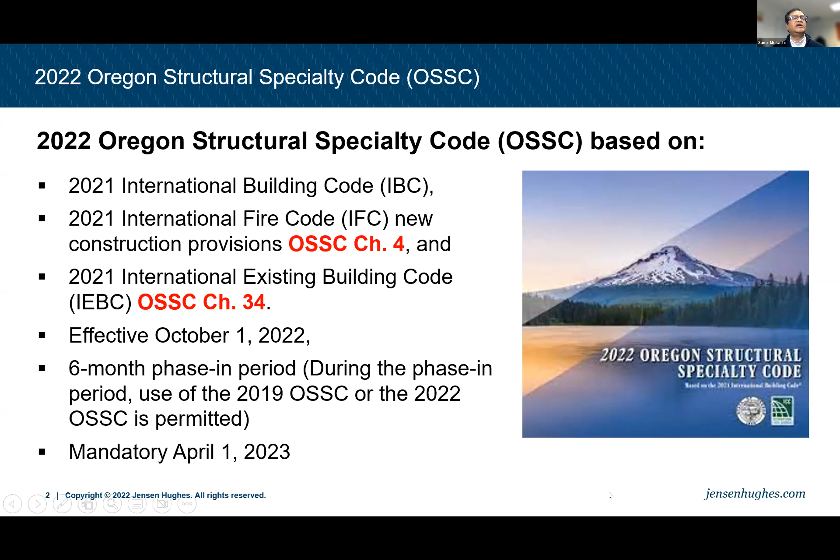Jody will talk about the energy code and the process involved with that, because we went from the Oregon Energy Code, which was the basic code that came from the energy code, and Oregon had developed something, to now going to ASHRAE as the base code and then modifications. So our energy code is actually a much smaller book, similar to the IEBC in Chapter 34. The energy code also gives you things that are changes, and then you compare it to the base ASHRAE and use that as a combination together.

And the Oregon Energy Code is still the 2021 Oregon Energy Code. In between, there was the zero code also. So we have gone through some name changes, but this is where we are on the energy code. And Jody won't go into the technical requirements because, and I might use the wrong word, she's not allowed to give technical clarifications. That is restricted to the building official. So she's going to talk more about the process, and I can talk about the code and things like that, and we'll answer your questions based on that.

With that, I'm going to roll into the changes to the 2021 IBC and the 2022 OSSC. So if I don't point out that this is an OSSC change, it is a base IBC change that Oregon has adopted. One of the things that the code changed in this cycle is the definition of the penthouse. So in the code, the penthouse and the equipment platform are really the two spaces where the code especially says that it is an unoccupied space.

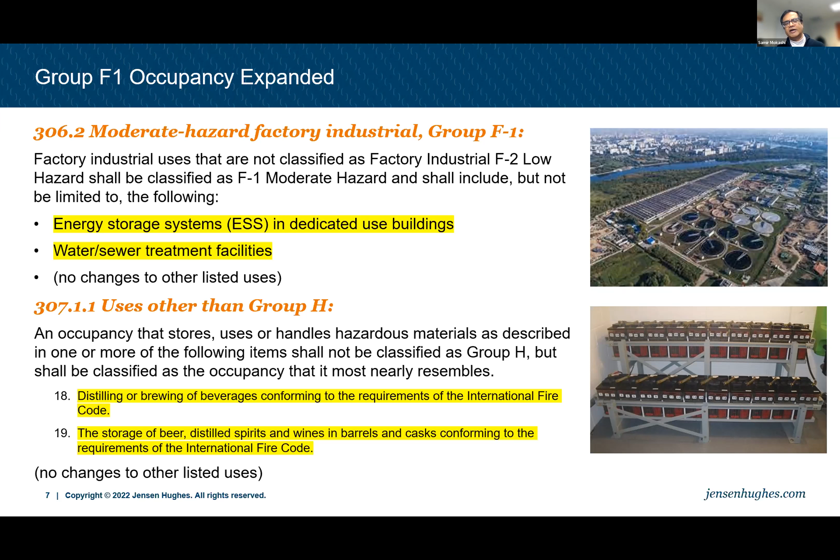But when it's mixed with water, it's very hard to ignite it. So the code is recognizing that dichotomy of the material and how it performs when it is mixed with water. And that's what it's doing. There were provisions in the code. In the fire code, there were different places you had to go connect the dots across multiple chapters and demonstrate that this could be a non-H occupancy, which is how we did many appeals in the past. But now the code is bringing that into the mainstream of the code and clearly articulating what that does.

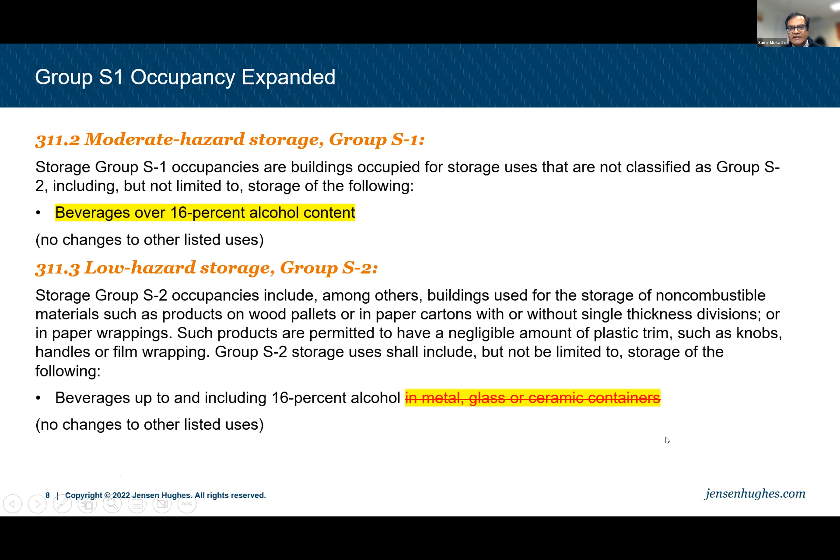Similarly, the moderate storage group S1, the IBC did not have beverages over 16% alcohol content, so that got added in the S1. The IBC in the S2 is keeping beverages up to and including 16% as an S2 for storage. Over 16 is S1, 16 and under is S2, and they took out the metal, glass, or ceramic containers because it's just based on the alcohol content.

And in Oregon, we added back in wood barrels, metal, glass, or ceramic containers because wood barrels are kind of an important part of how we treated it. And that's also how we treat the F2 occupancy. So that's the connection that Oregon has had, and we're continuing forward. So it's not a change to Oregon. It will show up as a change in the OSSC, but it's carrying forward the original intent Oregon was already doing.

Here's a discussion about something that changed in the 2018 cycle, not the 2021 cycle. A room or space used for storage purposes that is accessory to another occupancy shall be classified as part of that occupancy. The IBC says shall be classified as part of that, and Oregon says may be classified. So what that means is the IBC says if this is a B occupancy and this is storage, it has to be classified as a B occupancy and it's an accessory to this.

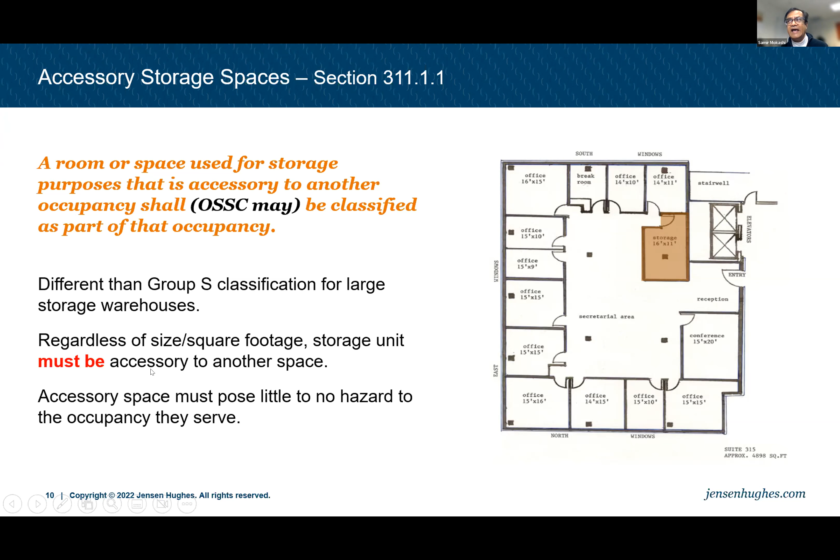So one of the things about accessory and non-accessory: when do you become an occupancy? I've always used the 10% rule. If an accessory goes over 10%, then it becomes a minor occupancy within the building. So the same philosophy I would approach here, that if you have storage that is more than 10%, rather than classifying it under the main occupancy, you should be classifying that as a separate occupancy. So the IBC statement is regardless of size it must be an accessory, but I don't think the code really intended it that way, because the hazards of storage should be considered beyond 10%.

Samir? So, yes. Sorry, I was just going to add one thing. There are also some reasons in Portland why somebody might want to keep their storage in S instead of moving it to that B, with our seismic triggers. So there are some local incentives where you might not want to do that shall, like he was talking about.

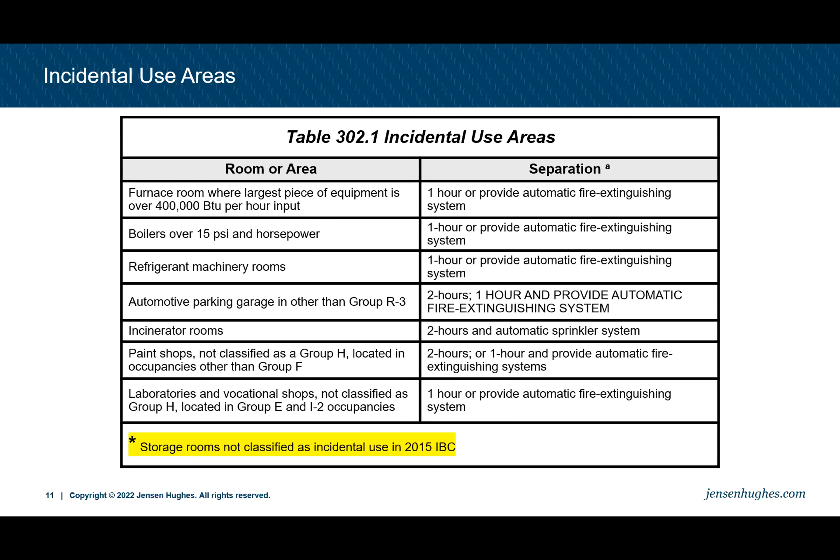See, great insight. That's why I asked Jody to join us this time. Thank you, Jody.

Incidental use. I don't know if everybody knows the difference between incidental and accessory uses. Incidental uses are typically functions that are part of the main building occupancy and are part of the building. Accessory uses are very distinct functions that become part of the main occupancy. So for example, a boiler room or furnace room that is common to most buildings becomes an incidental use. An incidental use is actually a room or an area that by nature of its operation can be a more hazardous room. And storage rooms used to be considered incidental rooms, and now they're considered accessory as part of the main occupancy. That's the change that took place.

As we have started going into mass timber construction, the codes are evolving associated with that as well. One of the things that is changing is that Type IV-A and Type IV-B construction more than 120 feet in building height require fire pumps with connections to no fewer than 2 water mains. If you go to the high-rise provisions, chapter 4, that's where this provision comes from.

In the past, when this first came into the code, I think in the 2006 edition, there were 2 separation requirements. Then the code wanted to change that to 420 feet, but that was mislabeled as 120 feet for a couple of cycles and then changed to 420 feet. And now with mass timber, that provision is going back to 120 feet for mass timber.

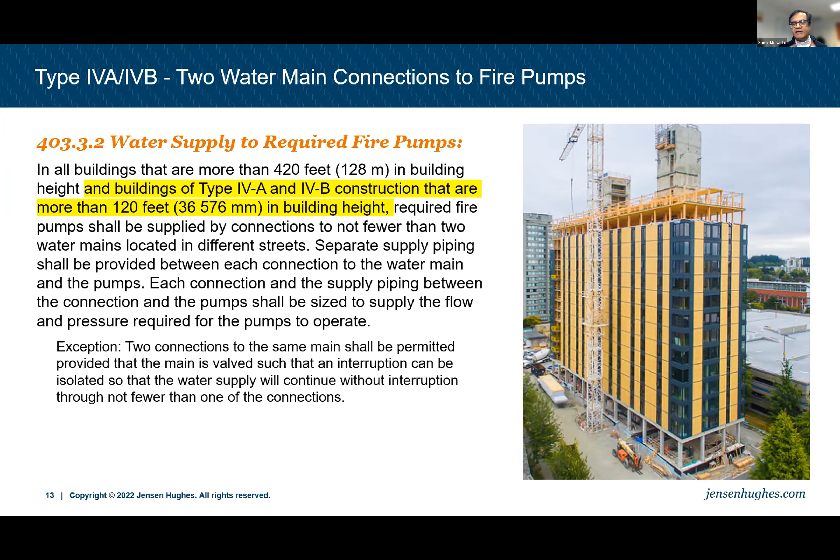Smoke control. One of the things about smoke control is the atrium concept has evolved. In this code cycle, the code has clarified the atrium definition, because I keep coming across people who say a 2-story opening is an atrium. And the answer is no. The 2-story opening can be treated as an atrium. There are multiple ways you can protect the opening. Atrium is one of them, but that's a different story.

What has happened is the code is saying that if you have a 2-story opening and the rest of it is separated by shaft construction, then the 2-story opening can be treated as a 2-story opening and does not need to be separated from the atrium above with the provisions of the shaft. If it's separated as a shaft opening, then smoke control is not required connecting that.

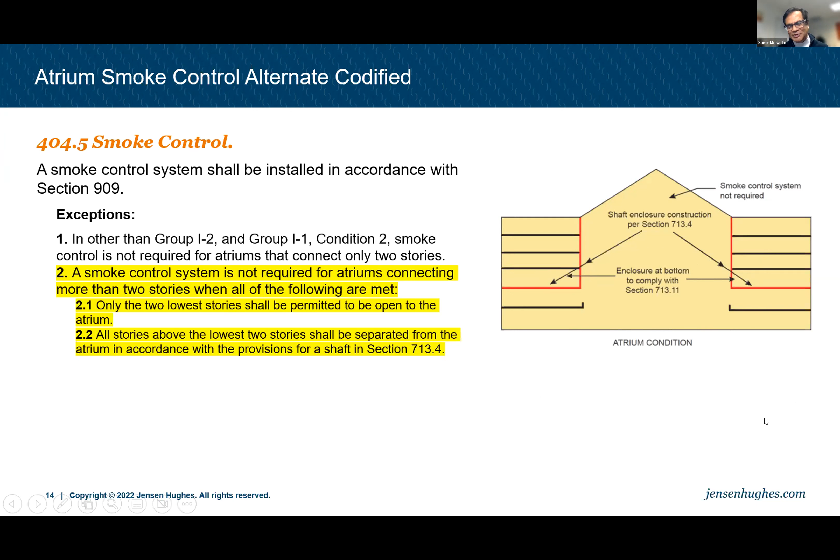This is an appeal that we've done in Portland quite a bit, and in many other jurisdictions, where the question comes up: I only have a 2-story, and commonly it's a 3-story building where the 3rd story is physically separated, so how do we deal with that? The code is now giving a prescriptive path. I'm sure your architects will find a way of doing something different than the code says, but at least this gets us closer to where the most common questions come up.

Another thing that gets clarified in the code is the enclosure of atriums and connections. The code allows 2-story openings to connect, but you cannot have the first and second story connected here and the second and 3rd story connected here, because then it connects together. So the question becomes, how do you deal with an exit access stair or an escalator that is going through? In the enclosure of the atrium, the horizontal is not required between atrium openings for escalators or exit access stairs.

Another thing that is changing, not a big deal for most of you, is that in parking garages there used to be a requirement for drainage. That requirement was taken away, and now it is being brought back in. There was a requirement for approved non-combustible, non-absorbent materials, and the S-2 parking garage exception that allowed no drainage went away, so now it will be required. We can have a traditional trench drain, or there are very thin drains that are not very visible but still work as drains. There are multiple options to solve those.

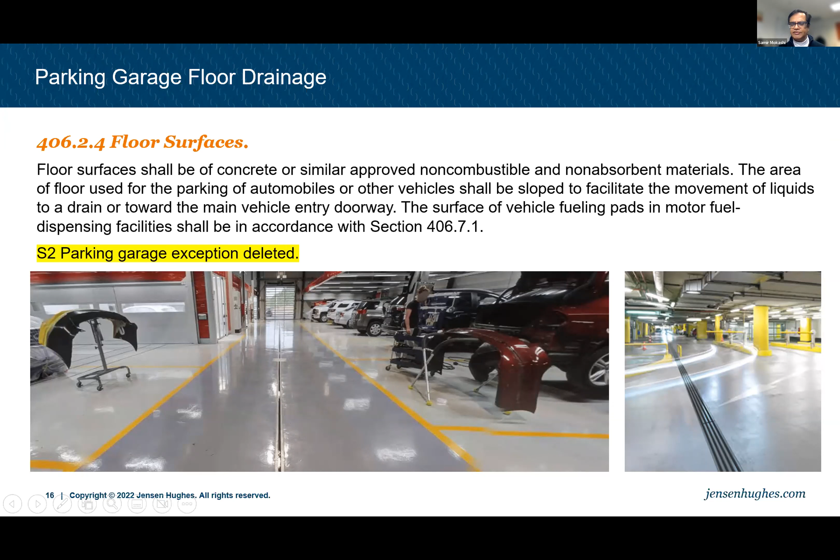Those are just aligning with NFPA 101. NFPA 101 and the I2 occupancies will continue to have differences. If you look at the basic business proposition, they both need to sell their books, and if they're all the same, you'll only buy one of the books. So there's always going to be a difference between the two.

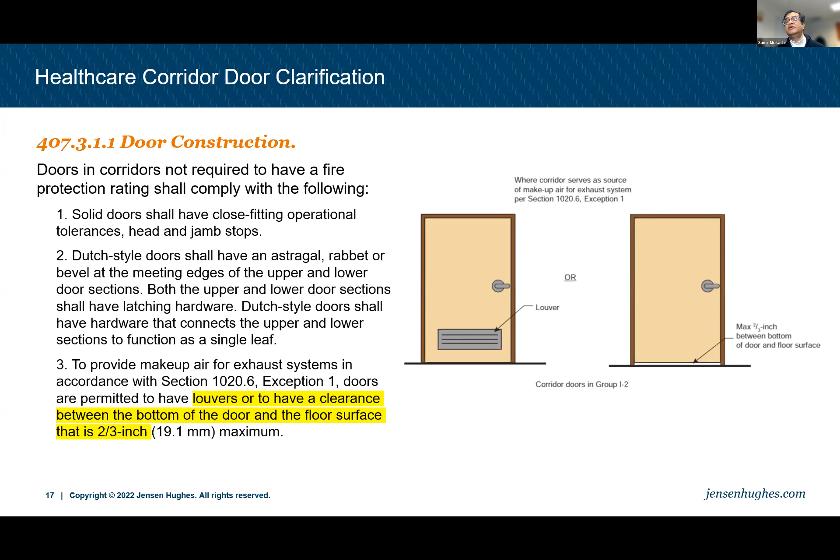So another thing in the I2 occupancy, which is hospitals and healthcare related occupancies: care suites, as they used to be called just suites before, are now called care suites. That change took place just last cycle or the cycle before. The exit access from other portions of the building not classified as a care suite shall not pass through a care suite. The whole concept of the care suite in a healthcare facility is that it's a protected group of rooms given some relief from other requirements, so making sure nobody else goes through those rooms to keep them independent and meet the intent of the code is important.

Another requirement is having a door leading directly to the exit access corridor, horizontal, with 100-foot travel distance within a care suite, plus an additional door leading to exit access or an adjacent suite, which is part of the means of egress. These were part of NFPA but not clarified in the IBC. Now IBC is aligning with NFPA on that. It's not a change for those who've been engaged with it, but it's the two codes coming together and aligning better on that issue.

Here's another thing the code is doing: clarifying the code intent and codifying it. Going back to the firewall requirement, the firewall originally was a building separation. Then in the last code cycle, around 2015 starting in 2018, it made additional changes. The code clarified that the concept of a firewall is to separate two structures of different construction types, having their own allowable area, heights, and story requirements. For example, you could look at the two structures as a single entity for means of egress. So the code limited what the purpose of the firewall is.

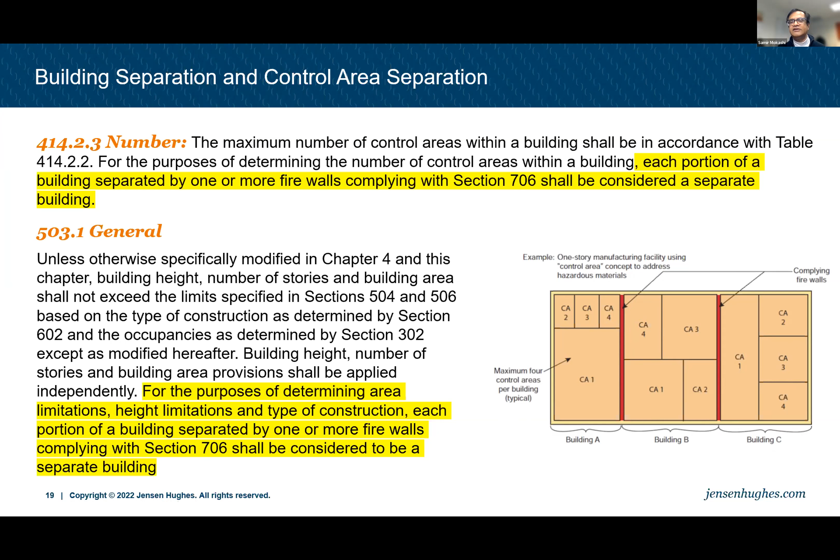By doing that, one thing they did not address was control areas, where hazardous materials are stored in the building. The code has a compartmentalization concept allowing multiple compartments to permit increased amounts of chemicals. Control areas and lab suites both do the same thing. In practical interpretation, we always said that once you have a firewall, on either side of it you can start over with control areas, but it wasn't very clear in the code, especially with the language that was added. Now that's clarified in the code, showing the intent that the firewall was meant to separate other areas as well, but where it's not explicitly stated, you could combine it.

Here's another thing about firewalls in general: the firewall requirement is to separate buildings. In the legacy code it was called an area separation wall, and there was a provision for it to be structurally independent, but it was never read or enforced that way throughout the West Coast. So our firewalls or area separation walls were built like fire barriers, just with higher fire ratings—typically fire barriers were 1 or 2 hours, while area separation walls went up to 2 to 4 hours. So now the concept of the firewall is to be structurally independent.

It's very hard to build a structurally independent wall, because that literally means the wall stands by itself as a cantilever structure, which is expensive and difficult to build. So most commonly, as the building gets taller, you set up 2 walls, which the code permits. The IBC had a table that said how to build 2 walls, but right now it refers to NFPA 221 for the requirement. So if you have a 4-hour firewall requirement, you build 2 3-hour walls. If you have a 2-hour firewall requirement, you build 2 1-hour walls. It's kind of an explicit table in the code.

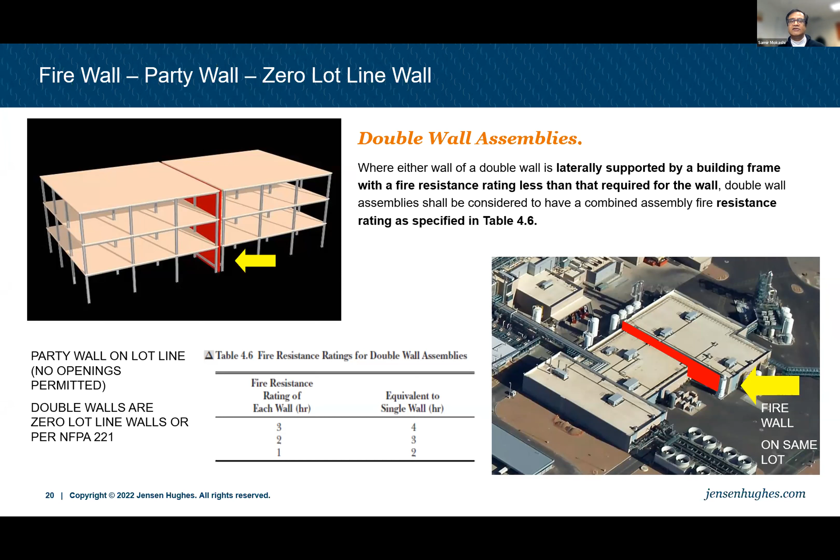So the question that comes up: if I have 2 2-hour walls, does the structure providing lateral bracing for that wall have to be fire rated? This goes to the basic concept in the code of making sure the structure holding up the wall is rated so the wall can keep standing. In this instance it's unique, and this is clarified in NFPA 221, more so than the building code. Because there are 2 walls, if one building collapses, it takes that wall down with it. The other wall is still standing, and that is a rated wall. So the structure collapses, and because the structure has collapsed, it opens up the fire and there's no ceiling above, so the fire goes vertically up. The intensity of the fire and the exposure on the wall reduces, and then the fire has to compromise this wall before it affects the other structure. So this 2-hour rated wall protects the structure behind it. Essentially the code is saying, as long as the wall is load bearing and the load bearing components are holding it together, the structure behind it doesn't need to be fire rated.

Here's how you terminate firewalls. When firewalls come to the exterior of the building, it's required to have 18 inches beyond the wall. Most commonly you don't see that, so what's going on? Commonly there are 3 conditions: combustible exterior sheathing, non-combustible exterior sheathing, and non-combustible exterior sheathing with sprinklers. Based on that, you can protect the perpendicular wall, terminate the firewall at the end of the building, and have perpendicular walls either protected for 1 hour, just non-combustible sheathing, or nothing required if you're sprinklered and non-combustible.

Similarly, when you have 2 buildings next to each other, how do you terminate that wall? The code allows 2 paths. Until these 2 paths were defined, we commonly used this condition where you have a building here and a building here, and this firewall comes through. The firewall, when the 2 buildings are on a common lot, becomes the assumed property line. The code allows the designer to pick the assumed property line, but once you do a firewall between 2 buildings on the same lot, that is the assumed property line. You bring the assumed property line up to this structure, and then it goes either straight out, or you can jog it, straighten it - it's up to the designer's choice. For example, in this instance where it's right at the property, this wall becomes a 0 lot line - the wall is 0 feet for the fire separation distance and treated that way. This other wall, which is perpendicular, now has 20 feet or more, and can be treated that way. That's how you design the exterior walls.

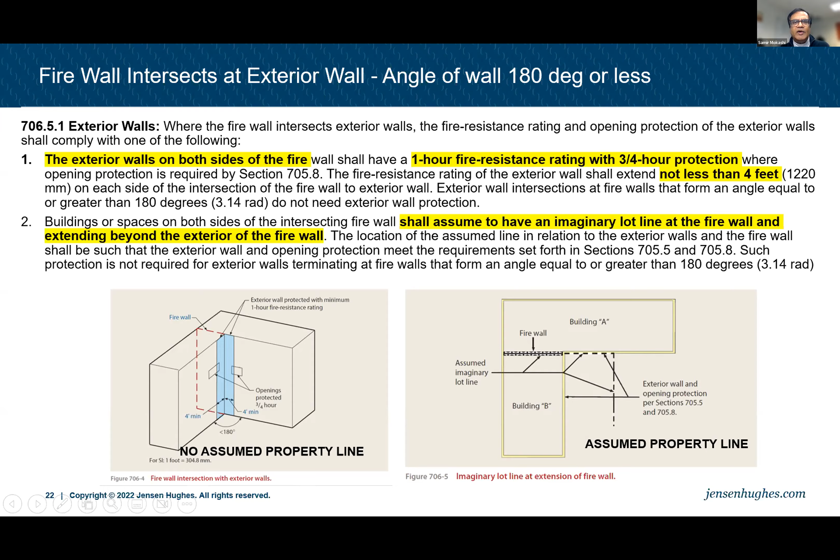Cross-laminated timber. Oregon has been ahead of the game in terms of cross-laminated timber. We adopted mass timber very early, and cross-laminated timber is a subset of mass timber. It's timber pieces that are perpendicular to each other, so one layer goes north-south, the next goes east-west, and the layer below goes north-south again. That's how cross-laminated timber is prepared.

There is glue laminated timber, or glulam as we know it. There is nail laminated timber and parallel strand lumber, so there are multiple ways of creating mass timber. Mass timber is essentially thicker engineered wood, and it's different than heavy timber. Cross-laminated timber is where we've gotten engaged, and it's called mass timber in the general materials. It's a very exciting change in the code, and very helpful in many aspects.

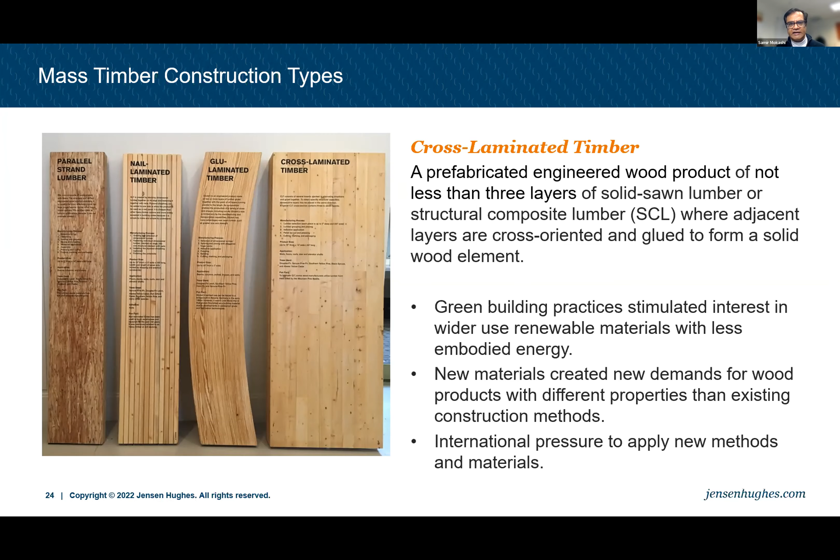In the last code cycle, Oregon adopted mass timber, but it was adopted as an appendix. Appendix P is where the mass timber provisions were brought in. Those were the provisions in the 2021 IBC that Oregon pre-adopted before the 2021 came in. That's one of the things Oregon did, and those become Chapter P, but now it will go into Chapter 5 or Chapter 4, Chapter 6, where all construction type related activities go.

It's useful to know that type 4A was based on Brock Commons Tallwood House back in Canada. Type 4B was based on the Framework building that Lever was doing here in Portland, which never actually got built — it went through the design process, got to the plan review process, but never got built. The construction type 4C was based on the Carbon12 building; I think Path Architecture did that, and that is the basis for the type 4C building. So this is where it came from.

In terms of allowable area, a lot of times people ask where do the allowable areas come from — they look so precise. Is there engineering or science behind it? Yes and no. There was a period in the code where construction type and allowable area were based on assumed fuel load. The New York State code had that provision for the longest time before they moved to IBC — through 2003, 2004, they had that provision, actually classifying buildings based on fuel load inside.

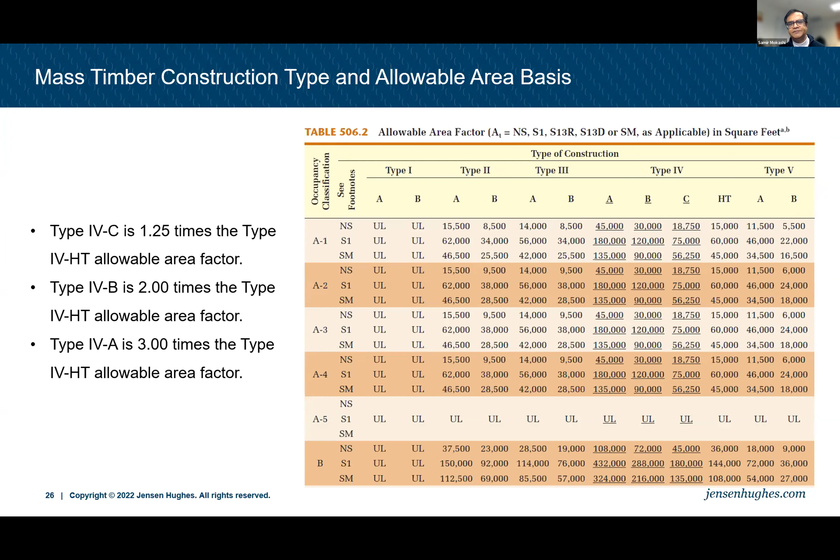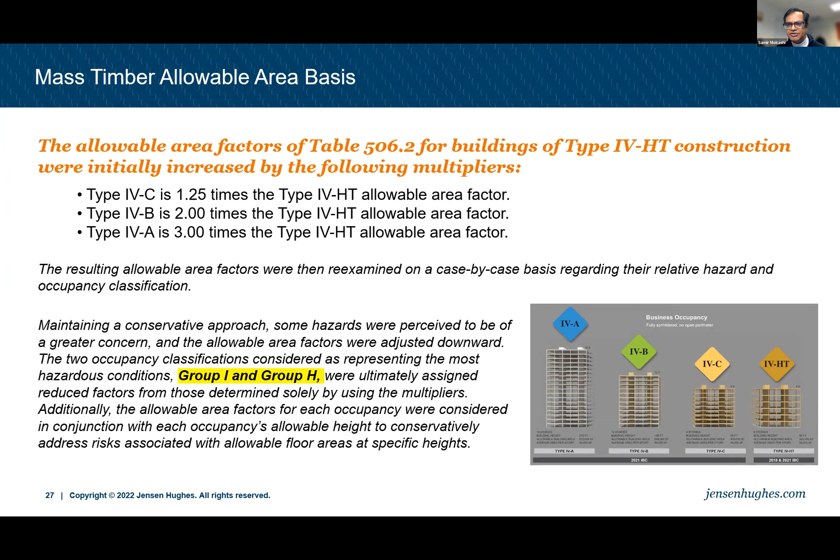One of the things they did, once they set this up, is they took the groups considered higher hazard — Group I and Group H — and their numbers were adjusted down to compensate for elevated hazard for these occupancies, especially in wood construction, which is how heavy timber relates. Why do I want to tell you this? Because it's always good to understand the code intent and where the code comes from, since this is still an evolving construction type, with challenges in how you can build it in terms of member sizes and things like that.

Here's an example of what I was talking about. There are actually two buildings that we worked with.

One is called Catalyst, and one is the Flatworks building. The Catalyst building was not in Portland, the Flatworks was in Portland. In the Catalyst building, the structure is multiple joists spaced close together, so the structure is very compact, but the Flatworks has deep glulam beams, almost 3 feet deep. And so in that building, the number of stories met type 4C, but the building height exceeded it and it became a type 4B. So paying attention to structure becomes important.

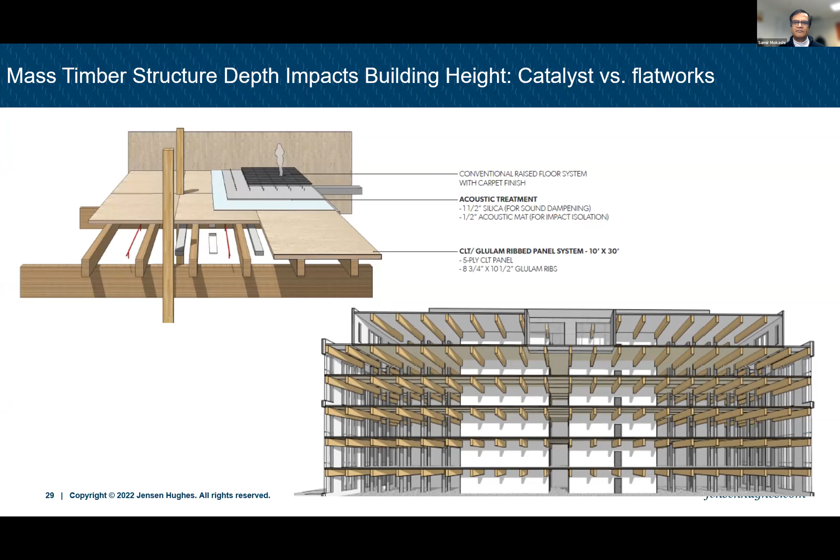So here are the basic requirements. In type 4C, if you look at all the components, the basic structure is 2 hours, versus type 4 heavy timber, where it is 1 hour. By using a higher rating for the structural systems, that's where the increase in allowable areas comes from. Then in type 4B, the construction of the structure doesn't change, but the exposed wall and ceiling changes. And in type 4A, the rating of the structure increases and there is no exposed wood inside the building.

So type 4C is what everybody loves. Type 4A most people don't like, but the reality is that type 4A is still a very efficient system. Eventually, as we get past the aesthetic of the wood and look at it as an efficiency factor, I'm pretty sure we will start seeing more type 4A construction as an efficient way to build buildings, because it comes as preset components. It's like a Lego set, it gets assembled very fast, and that might be where its advantage shows up. But right now, type 4B and type 4C are the more prevalent buildings that we see.

The exterior wall requires gypsum protection, so you don't get exposed wood there. And then concealed spaces have to be addressed as well. As you can remember, in type 4 heavy timber, concealed spaces were not permitted. Under type 4A, B, and C, concealed spaces are permitted and you have to mitigate them. And now in this code cycle, there is a change to type 4 heavy timber in that regard as well. We'll talk about that in a little bit.

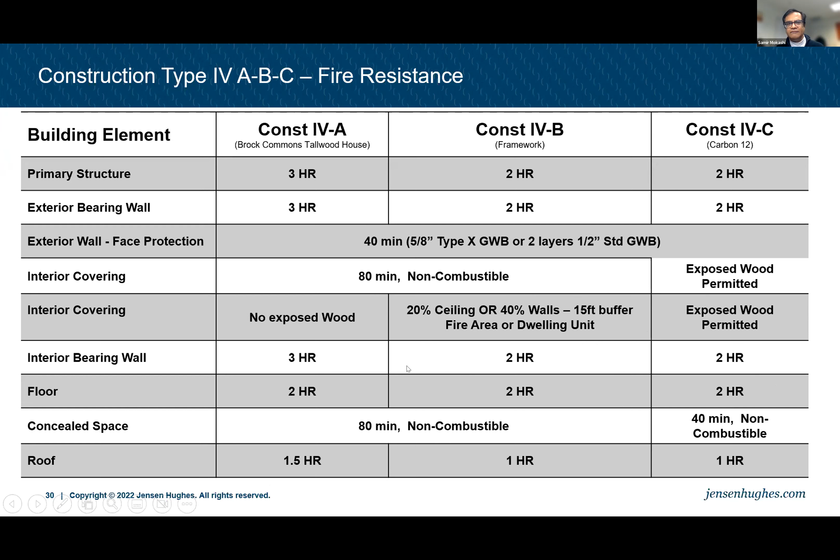So in the interior spaces, the 20% ceilings and 40% walls were based on the area of the room. So you could have exposed wood on the walls and some exposed wood on the ceilings in construction type 4B. In type 4A none, and in type 4C everything can be exposed.

Oregon is changing that and allowing 100% of the floor to be unprotected at the ceilings. So where you had ceilings that were partially wood and partially protected, you could have complete wood ceilings in type 4B in Oregon. The walls are still at 40%, but the 20% was changed. This is based on the 2024 IBC changes. The Tall Wood Committee has been looking at this for some time, and they have done testing and demonstrated that ceilings do perform well and don't need to be protected in type 4B. So that's where it's coming from.

So the protection of structure. The code says you can protect it by wood alone, or you can protect it by adding material to it, so you get a composite panel for the fire rating. If you look at basic fireproofing, sprayed fireproofing on steel is essentially providing an insulating material around the structure to prevent the heat of a fire from reaching the structural element. That is the same thing wood is doing, allowing an insulating material in front of it that will protect it.

The other alternative is that you take the wood component and oversize it. So if you need 4 inches of depth for your structural requirements, you add 2 inches to it, make it a 6-inch slab, and that extra 2 inches becomes the sacrificial wood that is okay to burn out as part of the protection for the system. That way you could have exposed wood all the way across. When you add gypsum, it protects the wood, but you lose the wood exposure. The code allows you a calculation method to do it.

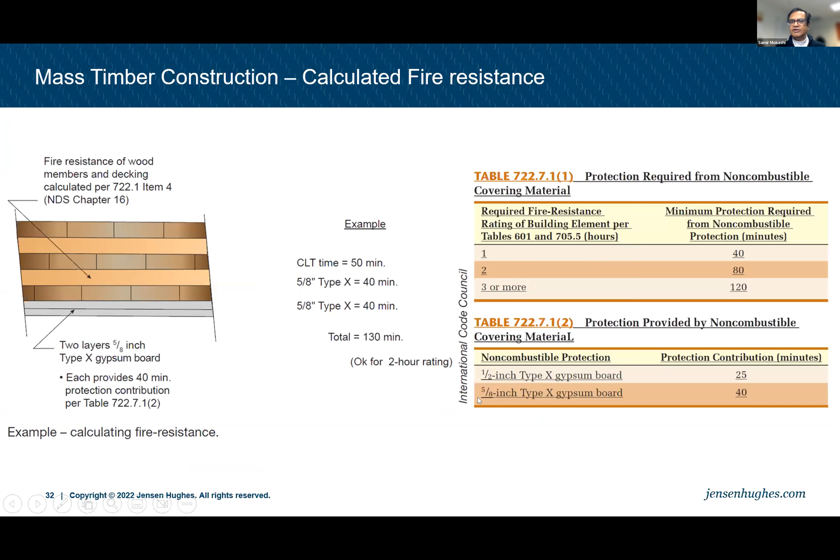So one of the things about calculating fireboard membrane systems: there is a general wallboard membrane that gives you calculations, and there are mass timber specific requirements as well. So mass timber addresses some of the elements. This is the general wallboard membrane requirement, and this is also in 722.6.2.1. So the wall membrane and calculated fire resistance is already part of the existing system, but it was co-opted into the mass timber, and that's where we work with it.

One of the questions that often gets asked is: I have a mass timber floor and I'm going to put gypcrete on top of it. Does that give me fire resistance? No, it does not, because the protection needed is from the bottom, and the gypcrete above does not protect the wood from the fire exposure.

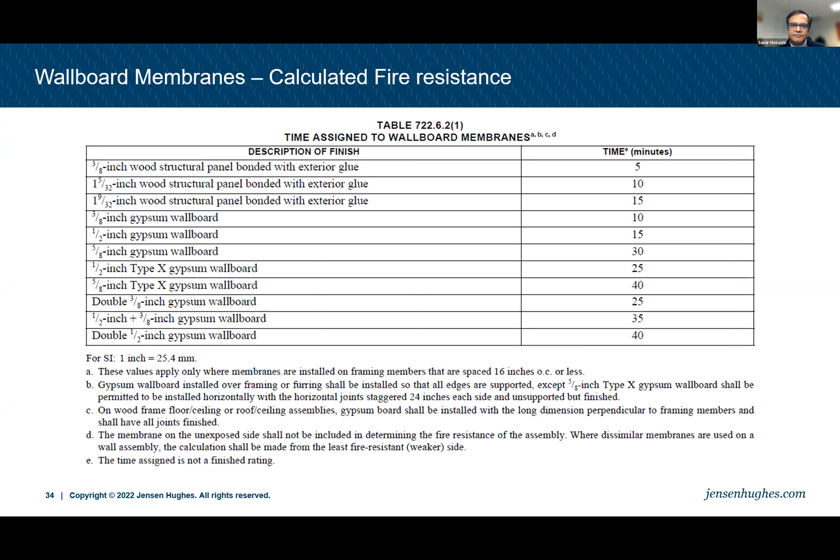The other thing that comes up quite commonly is the fire rated joints. If you look back to this structure, the connectors are all outside the wood and exposed. More common now are the hidden connectors between wood elements. And these become very good because they are easy to install, and they can come pre-drilled, pre-assembled, and you just slide it in and it works. And you can put fire caulking around it and it gives a good solid seal. So these are actually better systems.

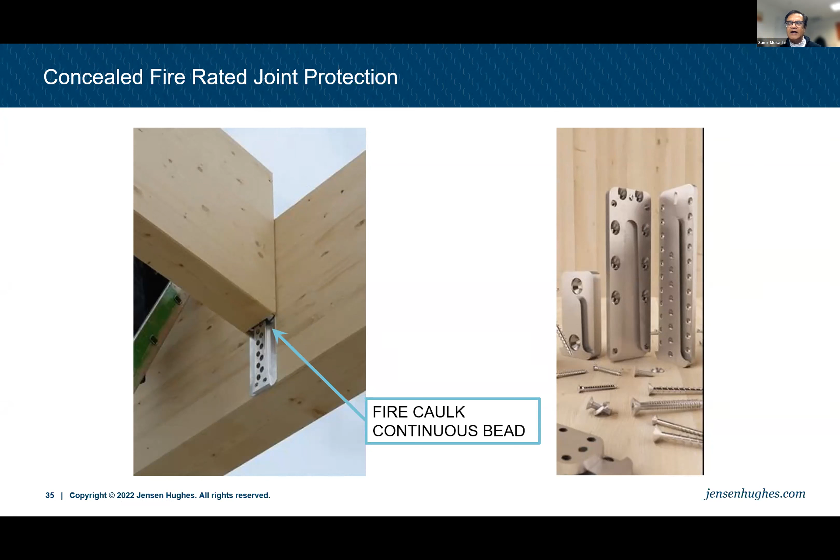The early mass timber connections became more of an extra effort, with intumescents on top of that, or wood covering on top of that. And then as these systems came out, everybody went to hidden connectors, and it has become much better that way.

Through penetrations in mass timber are different than standard. They are specifically listed and approved for mass timber. And the issue really is what happens when a system is connected to a through penetration. If you look at fire rated wood assemblies, at the bottom is the gypsum board or non-combustible element. So the fire rated structure, on the side exposed to fire, is almost always non-combustible. In mass timber, the exposure is wood.

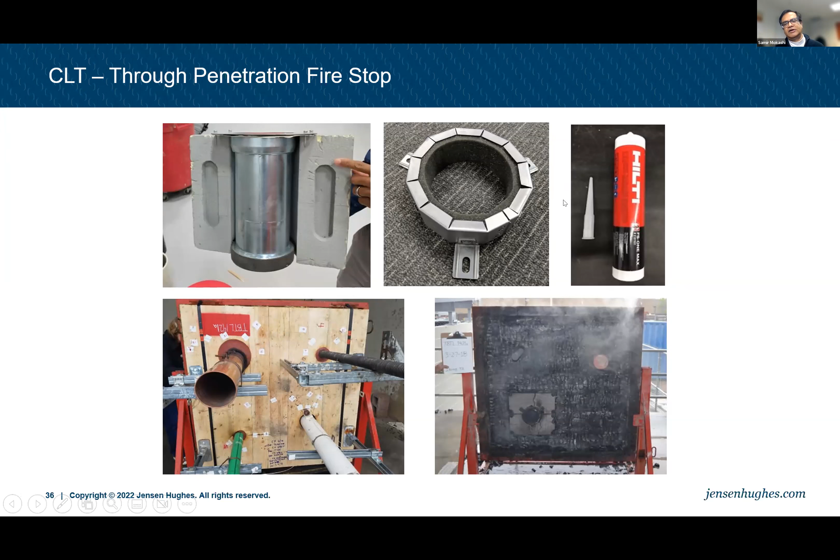So when the fire hits this condition, for example where the pipe is going through, the fire will burn around the pipe and make that gap bigger. So that's a concern that has to be addressed as well. And so these are different systems that will maintain that rating and not allow the gap to go through. These are tested specifically on mass timber, and those are the ones that you need to use for it.

Here's another thing that is not a change in the code, but I wanted to bring up because that's a common miss. So for mezzanines, the mezzanine area is limited to 1/3 of the room or space it is located in. Still, many architects think of mezzanine as 1/3 of the floor area. It is 1/3 of the room that it sits in. So that is important to do.

And the second thing about mezzanine construction: the code does not clarify what the mezzanine construction is, but the code commentary has clarified the mezzanine structure has to meet the building construction type. Therefore, the fire ratings of the building have to be done. There are mezzanines in Type 1A and Type 1B buildings that are just non-combustible mezzanines that are built in, but those need to be approved as an alternate based on limited size, contents, whatever. Otherwise, it needs to meet the construction type.

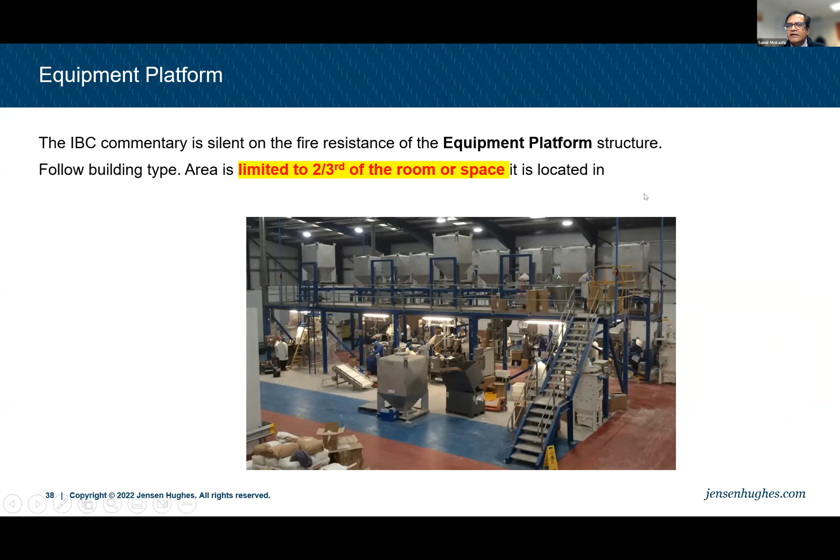On the other hand, for the equipment platform, the code is silent on the fire resistance. So equipment platforms could be non-rated because the code does not clarify what that requirement is and does not mandate it.

Here's another aspect of the code that is not commonly understood. When the code came in with the non-separated uses, most designers now want to do non-separated uses. There is still a place for mixed occupancy. And it's important to understand the difference between mixed separated occupancy and mixed non-separated occupancy, accessories, and all those components the code designs with. So let's take a look at this.

So in this particular instance, let's say there is a B and an A occupancy. The total building area is 9,500 square foot. You have B and A occupancy. If you do non-separated, then you have to calculate the building allowable area as if the entire building was an A occupancy. In this instance, the entire building could be A occupancy. So having a combination of non-separated A and B and designing to the most restrictive A occupancy is the solution, which is what we commonly see.

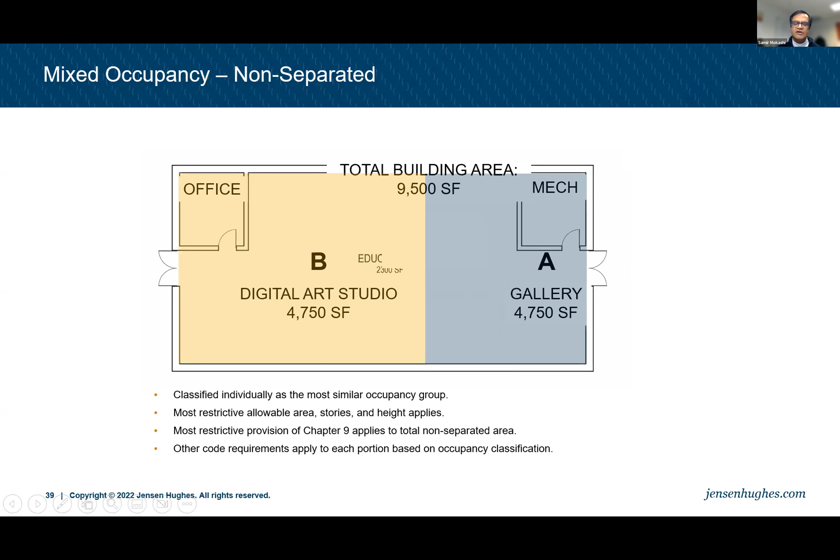But it's important to understand which of the occupancies you have, because even though it's non-separated, you still have to identify the individual occupancy. You cannot just call it A occupancy. You have to call it A occupancy and B occupancy and meet all the requirements of each occupancy outside of the allowable area requirements.

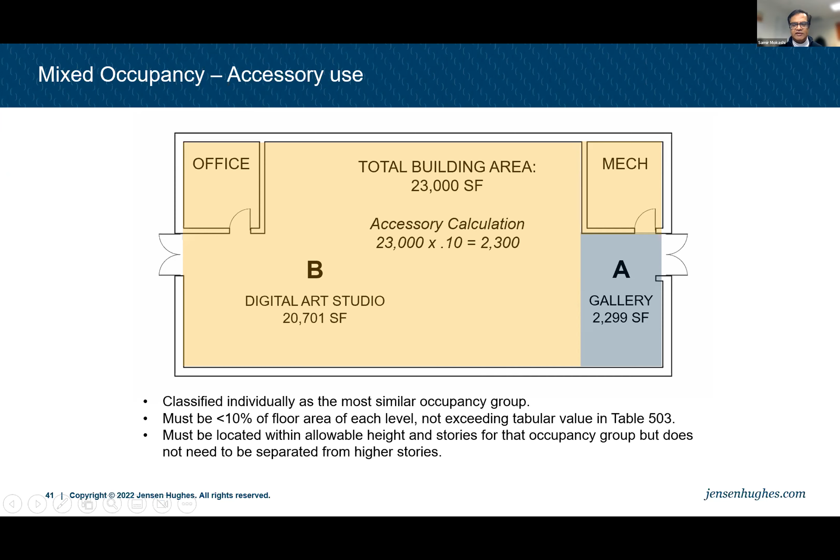The other thing to pay attention to is A and B. If you say that this is going to be 10%, how does the building official ensure that down the road this doesn't grow and become 20% of the floor area? That is an important question that often gets asked in the plan review process, and you might be asked to demonstrate a physical barrier or something like that to ensure that the A remains that size and does not grow. And when it does change, there is an ability to administer the requirements. So here's the discussion about mixed occupancy and accessory uses, how it all comes together, and how it matters in the end.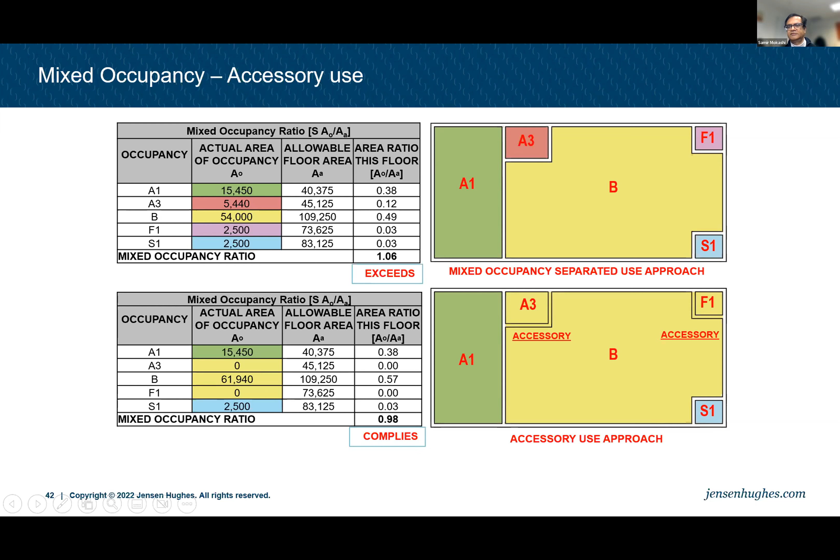So allowable area: oftentimes people look at the allowable area table and assume that the allowable area listed in that table is allowable building area; it is actually allowable floor area. So what it does, it gives you a maximum floor area for the building. If the building becomes 2 stories, then your sprinkler increases for multi-story building sprinkler increase. And the area that you get in the table is allowed for each story. So you can double the area that is in the table.

If you go to 3 stories, you can triple the area. If you go to 4 or more stories, you're limited to 3 stories for most occupancies, except NFPA 13R allows you a 4 stories increase, which is a different equation, and that is not explicit in the code, but it is implied in the code. So technically, you're allowed a multiplier of 3 for the building compared to the floor area that you get.

So structural fireproofing, similar to the mixed hybrid structure I talked to you about, when you have structural fireproofing, it is required for the load-bearing component of the structure, not the lateral bracing component of the structure. But the code has now clarified that for lateral bracing, it shall be protected for a distance not less than 12 inches, or the entire length of attachment when it's less than 12 inches.

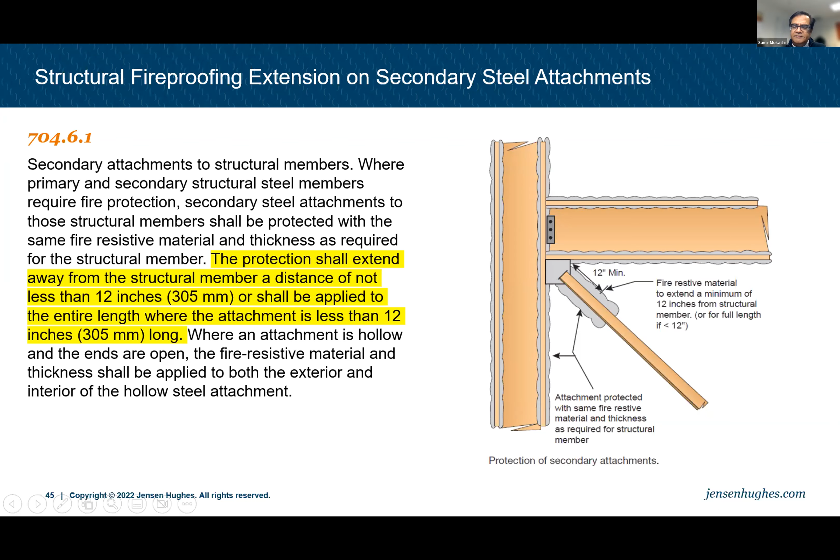Here's the termination of the shaft at the top of the building. So the shaft enclosure, you can terminate it at the roof, you can take it above the roof, or you can terminate it below the roof. And so the shaft comes up to the underside of the roof structure. The structure above has to meet the construction type, but openings don't need to be protected.

If the shaft ends below the roof, then the top of the shaft has to meet the shaft requirement and close it off. Any penetration through there would be fire stopped or dampered. If you go above the roof, then the structure above the roof is now a penthouse. Because essentially the intent of the shaft is to protect from fire migration between floors. It's a vertical opening protection. Once you get outside the building, the code does not care.

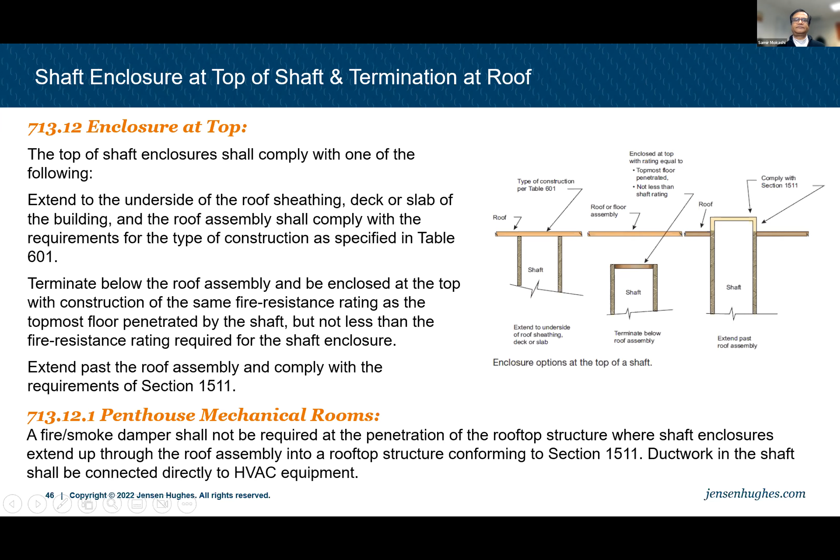Structural frame requirement. The columns are required to have a fire-resistance rating and need to be individually encased. So the columns get wrapped in this. This is a common question that comes up, if the column is encased in the wall. The column needs to be individually encased.

The primary structural frame members, other than columns, do not need to be individually encased if they're not supporting more than 2 floors, more than 1 floor or roof, and not a load-bearing wall more than 2 stories high. So there's an exception, but columns always need to be individually encased.

So one of the things that code did clarify is stud columns, boundary elements located entirely within bottom and top plates. We have plates top and bottom, so they're not going through and penetrating a hole through. Those could be treated as the wall assembly.

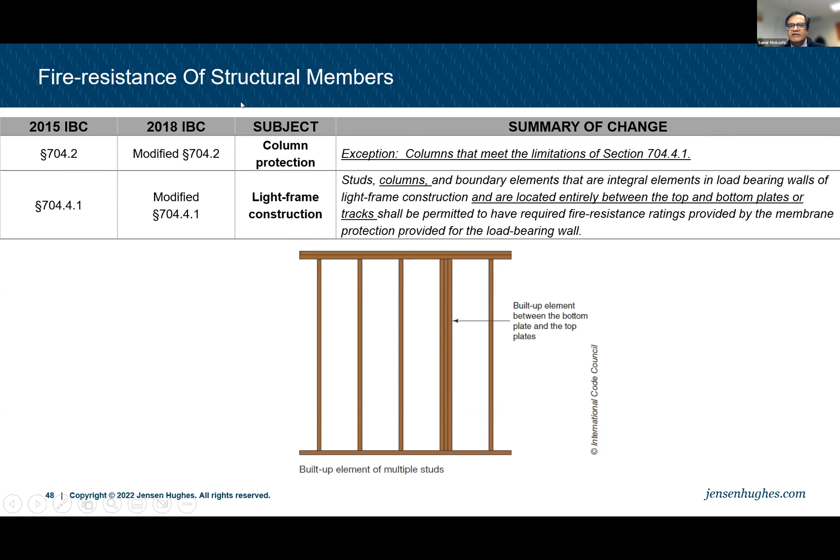And this is kind of a practical solution because oftentimes in walls, you have multiple studs come together for load bearing capacity, for point loads, and treating them as columns is a very difficult task to do. And so these are technically load bearing walls, and this becomes part of that. And so there is an exception for light frame construction that was granted.

So the fire exposure on one side for exterior walls, this comes as a common question. There are not that many UL assemblies that are for bearing wall rating for fire on one side only. So typically in a building, the fire exposure is expected to come from inside the building. So your exterior walls are protecting other buildings, not the other way around. So your wall rating is based on fire inside.

So if you have adequate separation, which the code says is 10 feet, then you can have the fire protection on the inside and not have it on the outside. So it's an asymmetrical wall rating. And then the exterior is sheathing and cladding, and then gypsum and the rated assembly is inside. That's the fire exposure on one side.

Also, Samir, on that one, Portland will accept the walls that are in that Type 3 code guide. The ones that are more than 10 feet talk about some different options. Those walls weren't tested, but we do accept those even for buildings that are not using the Type 3 code guide. You can use those wall assemblies for fire exposure from one side. Very good.

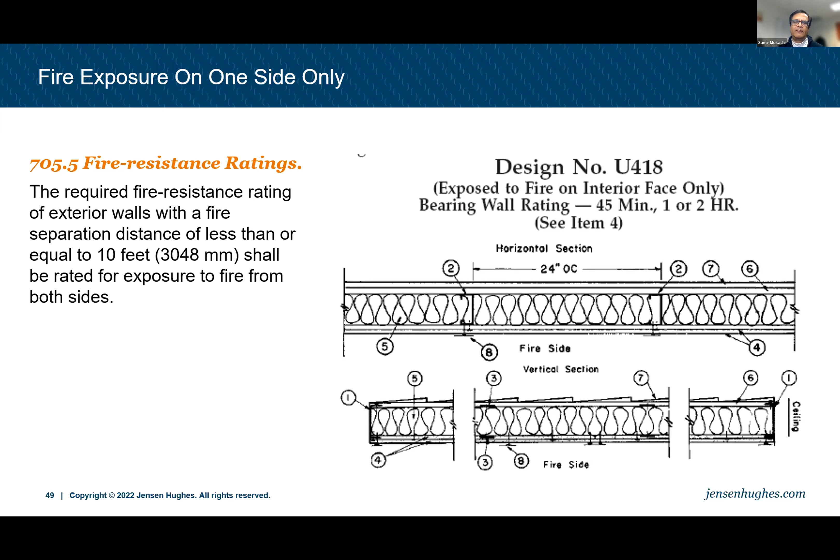So in the types of construction, even though this is not a code change per se, one of the things I wanted to point out to everybody is the similarity. So Type 5B, Type 3B, and Type 2B are all non-rated construction. So the B is the non-rated construction, but Type 1B is not non-rated. So Type 5B, 3B, and 2B are non-rated, and the ratings come from there.

Type 5A, 3A, and 2A are all 1 hour, but Type 1A and Type 4A are similar in construction. Type 1B and Type 4B are similar in construction, and Type 4C is its own thing, and heavy timber is its own thing in the construction type. So if you start looking at what do I need to do, there are similarities in these ratings. The footnotes to Table 601.

So roof supports are permitted to be reduced by 1 hour, where supporting the roof only. So what that typically means is if you have Type 1B construction and your primary structural frame is required to be 2 hours, then you can reduce to 1 hour, but you cannot reduce to less than the 1 hour required.

And then for Group F-1, H, M, and S-1 occupancies, except these, you can have 20-foot construction and then protected by fire retardant treatment. So here's what it means. If you have a roof that is completely 20 feet above, then you can have this structure be unprotected. But if you have a mezzanine or something like that, then this is still protected because it has to be 20 feet above everything else.

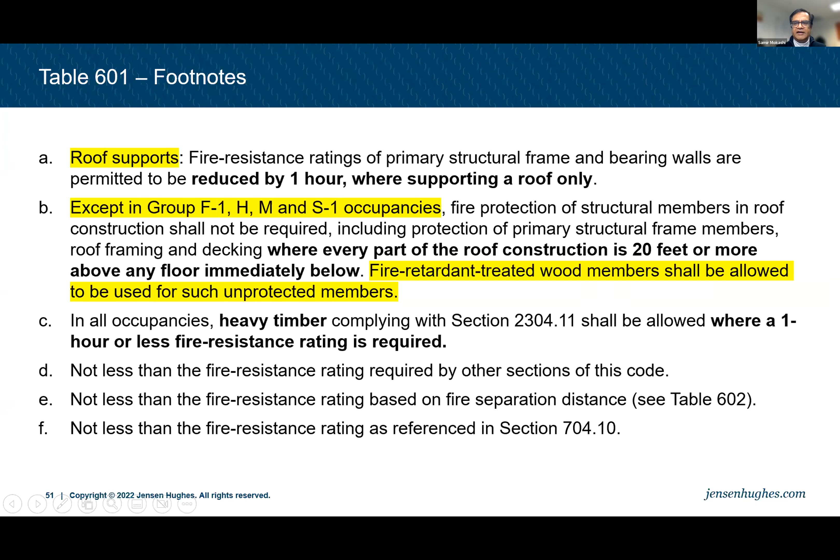So here's the changes that OSSC does. The reduction is not applicable to occupied roofs or roofs supporting rooftop structures regulated by vegetative roof, etc. So Oregon is adding that amendment to that provision.

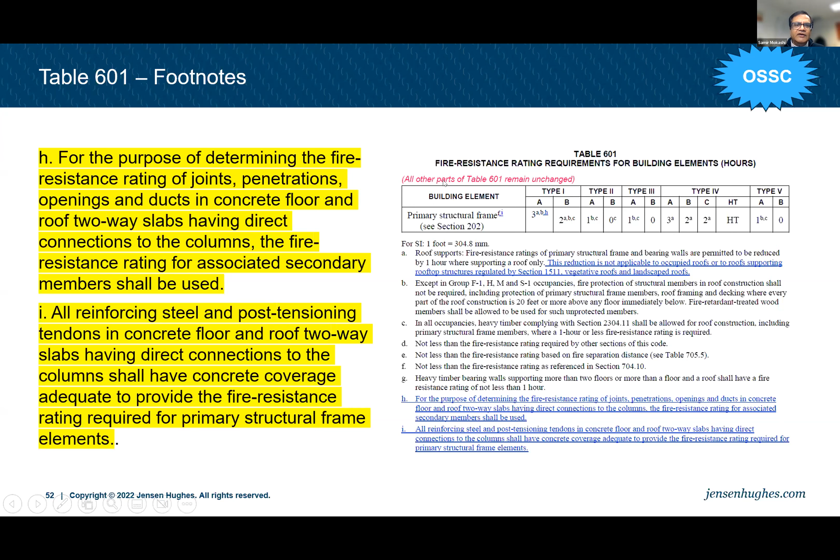It is also clarifying the rating of joints, penetrations. This shall be used. This is an Oregon amendment put in place last code cycle, which has to do with PT slabs and what opening protections are required, allowing the floor slabs to be 2 hour rated versus, if it became primary structure, 3 hour rated. Here's the additional component added to that. These two were added in the notes versus a specific code change, as part of the requirement for PT slabs.

It's very unique to Oregon. We just talked about this and how this works.

Additionally, fire retardant treated roof in type 1 and type 2 construction, fire retardant treated wood is allowed in roof construction, including girders. In type 1A construction, only greater than 2 stories, roof construction has to be 20 feet above to use FRT. So there are limitations on how you can use FRT, but FRT is permitted in the roof construction. That's why you see type 2B buildings with roof construction above them.

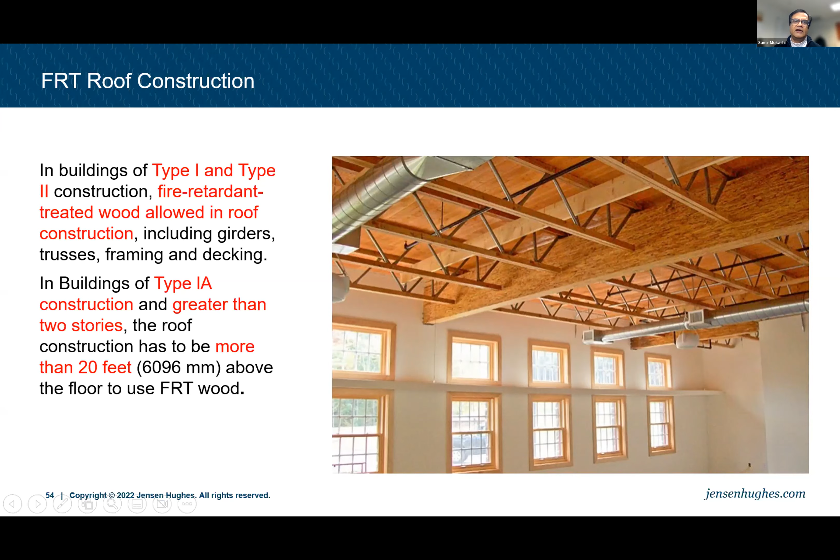Portland has fire requirements that are not in the building code for all wood buildings, not just mass timber, at a certain height while under construction. So those are Jody's point.

Jody, do you want to add to that? Is this the same thing you mentioned or more than that? No, I was trying to answer the question that was in there about the piece about buildings under construction and the fire safety requirements. The building code doesn't have them. The fire code covers that. Yes, okay.

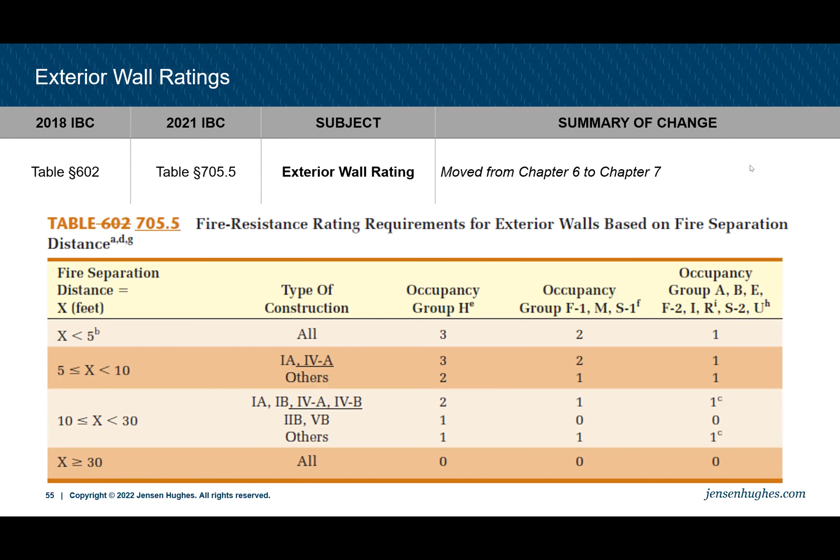Exterior wall opening protection: exterior wall percentages are to be managed based on each floor. So the percent rating is by floor, and the exterior wall fire separation distance is measured perpendicular to the wall. There was a period when the code allowed you to measure that perpendicular to the property line, and now it is perpendicular to the wall. Some of the older buildings, if you go there, you might find that was the basis for it. Today's code, it is perpendicular to the wall.

Based on that, your opening protection can vary based on each wall, and it also depends on each floor. For this example in the commentary, this wall is 20 feet, the next floor is 15 feet, and the floor above is 9 feet.

And that is permitted. In a project we did in Beaverton, we actually had the assumed property line jog. Both the buildings were flat. We jogged the assumed property line and measured the opening percentages based on that. This was a parking garage and they didn't care about openings above, but at the bottom was an entrance to the parking lot. This was a theater, and the wall below was a back end, and they didn't care about openings, but above they needed. So we were able to jog the assumed property line. The firewall you cannot jog, but the assumed property line you can jog, but nobody had applied that vertically. It's commonly horizontal. Based on this provision, we applied that vertically as well, and the building official approved that.

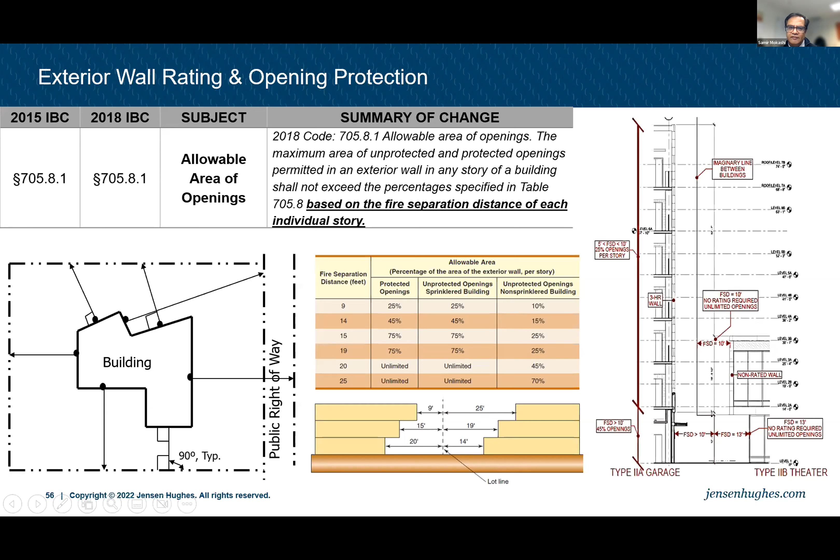Exterior wall openings, just a general note, is based on fire separation distance, but there are also additional requirements like party walls, not allowed to have openings. Fire walls have limited opening size: non-sprinklered, 156 square foot; sprinklered, but there is an exception up to 25% of the wall length. So people sometimes miss these requirements.

The fire barriers, again, 156 square feet or 25% of the wall length, and there are some exceptions to the 25% in fire barriers compared to fire walls. Fire partitions have openings based on wall requirements, smoke partitions have restrictions on smoke migration. So these are kind of the unique things that often get missed.

So in the code, now type of assembly based on opening protection. In the last code cycle and this code cycle, there's changes. And ASTM E119 tested, or there's also a term called fire protection and fire resistance that the code now uses. The fire protection assembly is a fire door assembly, tested assembly. Fire resistance assembly is tested as a fire barrier or firewall. So ASTM E119 tested is fire resistant tested.

So as you go through these door and window openings, pay attention to that. The wall assembly is 4 hour. The door is not—it's either a fire door of 3 hours, but within the fire door, if you need a vision panel, that has to meet the ASTM E119 test. So essentially a 3 hour door does not have glass in it. There are some doors with glass that are allowed, like 1.5 hour doors tested with the glass in it and permitted for this, but in this case, that glass has to be fire-rated glass, meeting the fire barrier, firewall requirement.

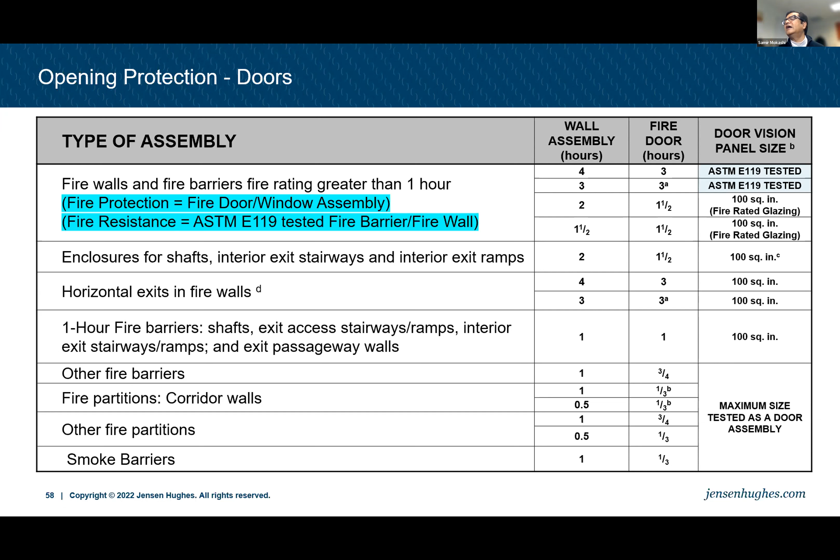So that's the nuanced understanding of how to read these tables. The rest is very similar to what you're used to—just understanding what goes where and how it's put together in that framework. So similar to that, wall and window assembly. This was for the doors, this is for the windows.

There is a labeling requirement coming. W stands for window, D stands for door, H stands for hose stream, O is for opening protection versus wall protection, and XXX are typically the minutes. So this one, for example, says opening with hose stream protection for 45 minutes. And this one says window for 60 minutes. So this is how the labels will be there and provided and read through.

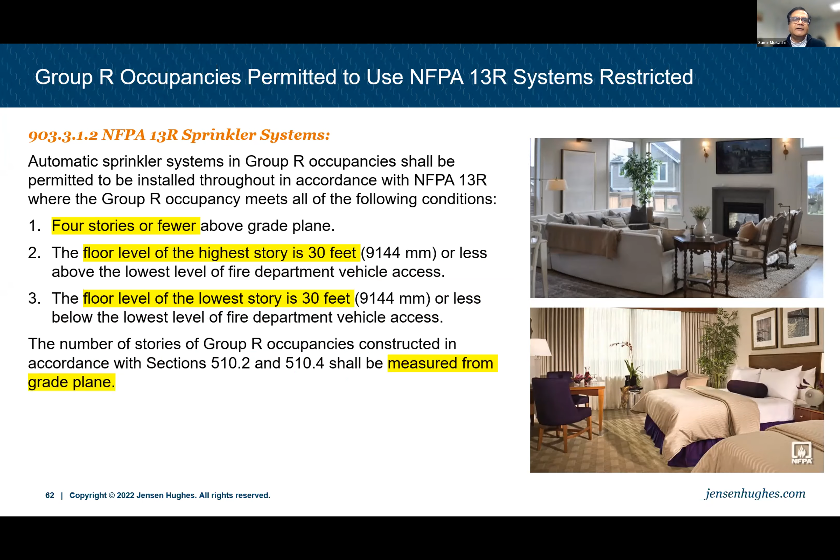So this is the changes in the 13R as it affects all Group R occupancies. Oregon makes a change to it. In the IBC, all Group R are lumped together for NFPA 13R restrictions -- R1, R2, R3, R4, all of them, right? In Oregon, we are making special exceptions for other than Group R2. So Group R2, R1 is transient, R2 is permanent. By code, transient is 29 days or less, and permanent is 30 days or more.

So the floor level of the highest story is 30 feet, and for R2, then required fire department vehicle access. So it's adding it to required versus what is available, right? So the question that comes up here is fire department vehicle access and required access.

This question comes up so many times when you're just inches over the high rise threshold. I get all the clients coming to talk to me, 'I'm just inches, why is it a high rise? It's just inches above it.' City of Portland, and Jody, you can jump in if you want to -- City of Portland does not give you any leeway on the high rise definition. Portland will give you what I call 'high rise light.' So it will give you some relief.

So code modification if you're slightly over and your other things work well, but the high rise definition, no discussion about it. All right. But in this case, this lowest level required fire department access is a unique thing to Oregon. I don't know if Portland has made any difference to it, but Oregon is allowing that. So roof assembly less than 45 feet. So there's additional requirements added in Oregon that make it a little bit more relaxed for R2 occupancies.

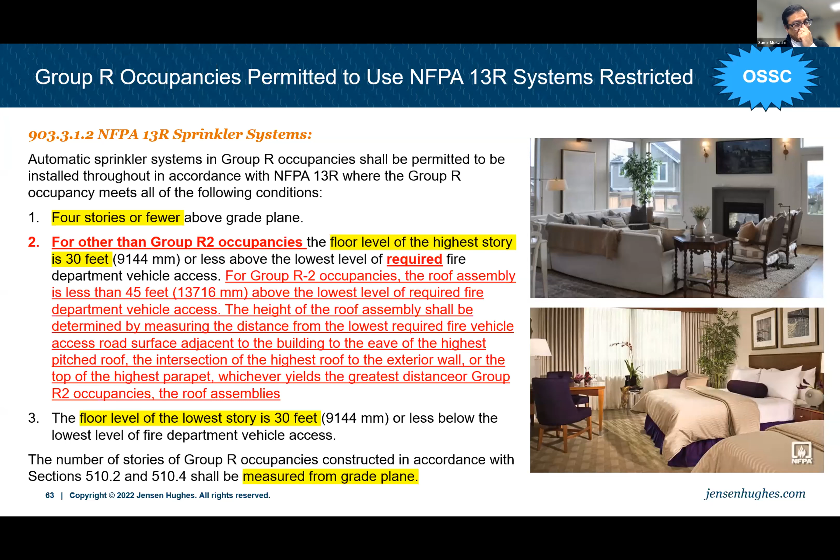Jody, I'm not doing another presentation without you again. Colleen, we just book her forever and ever. This is perfect. You guys are getting a wonderful presentation. This worked out even better than I thought.

So mechanical parking garages are becoming more prevalent. It's more compact. It can pack more cars in a smaller space. It's just overall better for everything because you're not spending on large buildings and things like that. But the flip side of that is the fire protection. Cars in general have more plastic components than they used to have. So any car fire can generate more fire, more flame, more heat, more smoke. Needs management more than

cars of the past. Electric cars added the component of lithium-ion batteries. So that is becoming another issue. So the protection of cars in general needs attention. On top of that, when you become a mechanical store where everything is kind of enclosed and covered up, the fire department cannot get to it. So in case of a fire, the sprinklers have to do the job completely. There's no way that manual intervention can take place. So that's the added component.

So the code has paid attention to it in the IBC chapter 9, which is the sprinkler requirements. And there's additional requirements to that. And it is requiring a specially engineered automatic sprinkler system. It does not say what it is, but it is requiring that. Portland has a guide that Portland has adopted. And I haven't used one recently, but most of your MEP engineers should know it. If you don't know, we can go find it. But the Portland Fire Department has a guide on that.

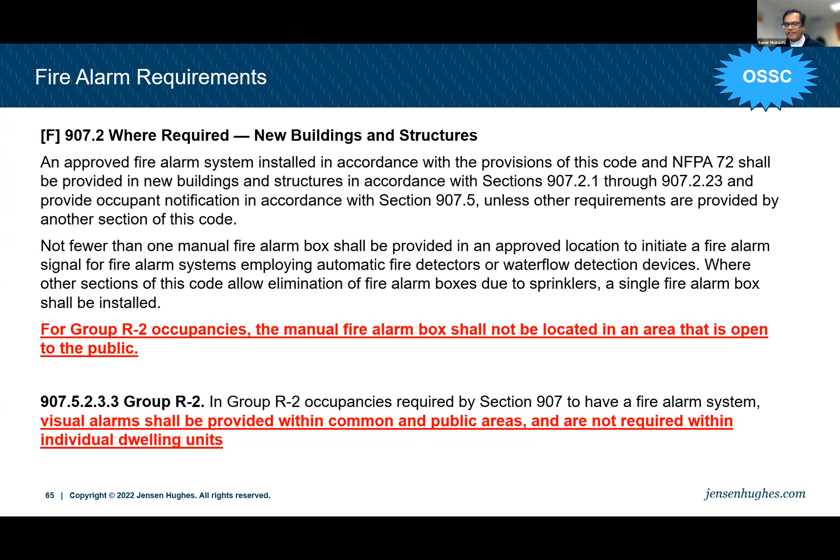Similarly, visual alarms shall be provided within common public areas and not required within individual dwelling units. Again, your people are trying to sleep, and a nuisance visual alarm can create a problem, but also visual alarms can have other effects for people with disabilities as well. So that's the reason there's an exception in the OSSC for it.

Carbon monoxide detection. Oregon was ahead of the game in carbon monoxide detection. We had our own standards that we had developed. The IBC came afterwards and created that section in chapter 9 for carbon monoxide detection. Then Oregon incorporated Oregon provisions within that, and that happened in the last code cycle. Last code cycle, carbon monoxide got pulled into the base code.

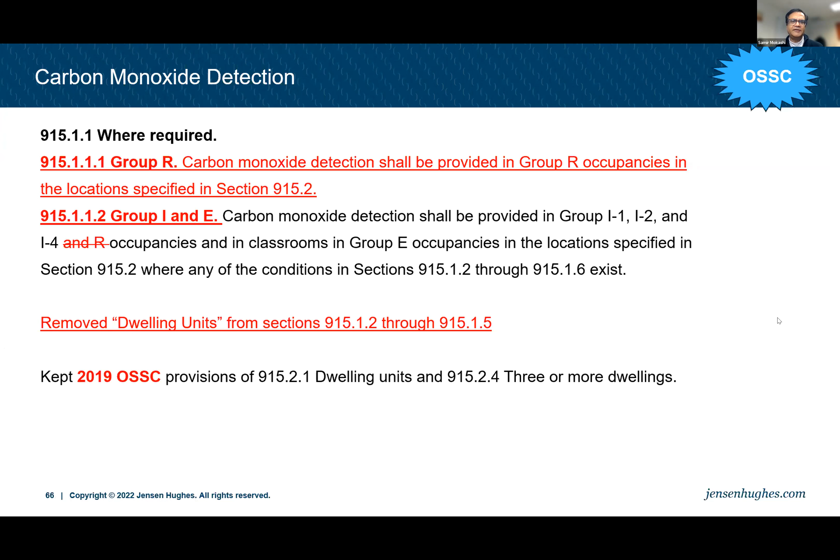Oregon amendments were added, and this is just a continuation of those chapters, and Oregon has made amendments to it based on that. One of the things that Oregon did is remove dwelling units from sections 915.1.2 through 915.1.5, and then added dwelling units as a separate piece after the fact. I don't know the rationale behind that, just pointing out that this is what Oregon has done for the alarms requirement, and pay attention to it as you go forward.

Fire Command Center. You're primarily aware of it in high-rise buildings where the Fire Command Center is required. The Fire Command Center in high-rise buildings was there for some time, and then it was bumped up to a bigger size as equipment got bigger. Now fire command centers are getting added to large F and S occupancies. So F1, S1, moderate hazard factory and storage, over 500,000 square feet. So this is not a typical building. This is very large buildings.

These size of buildings would commonly be a Boeing hangar, for example, an aircraft hangar, or a car manufacturing facility, potentially. Could be all large F1 type of occupancies. And a large Amazon type of storage warehouse, for example, where there's very few people in a large space with a lot of combustible materials potentially. So the code is starting there. 500,000 square feet was the threshold that was identified, and when you have that, you need a fire command center.

The location shall be approved by the fire code official. In Oregon, it will become the building code official because Oregon goes to building code. I haven't seen this particular requirement in the Oregon code, but the reason for the official is to make sure that the location ties up with the capabilities of the local fire department. So code does not mandate something that will not work at the local level. Often it leaves approval by the building official or the fire official as the provision to get that dialogue and discussion, so it's actually a working solution.

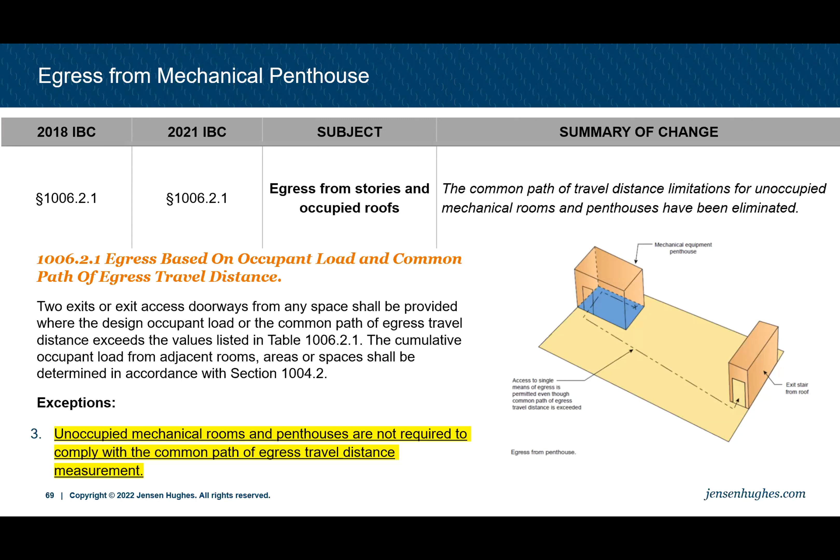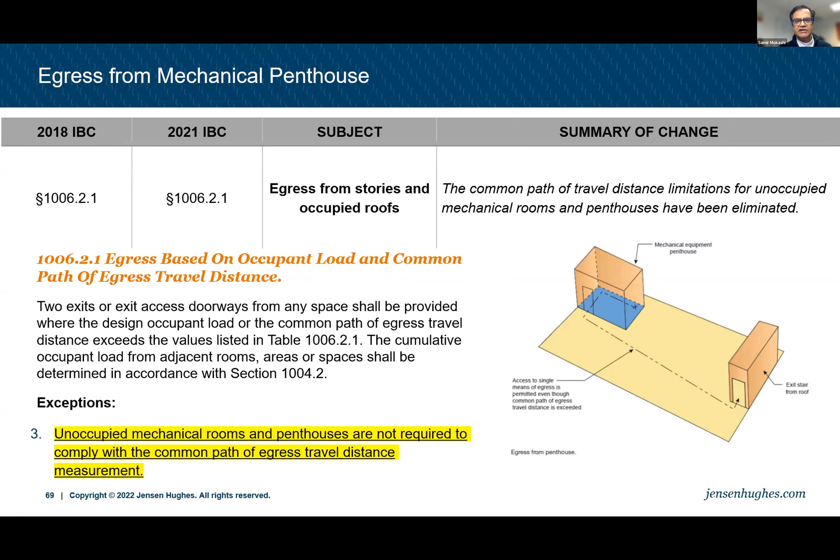But we do sometimes have mechanical rooms in a basement, or partially a basement, with bad ceiling height, especially in existing buildings. So we haven't had any discussions on policy with this change. I'm interested to see how it plays out. Okay. So that's the code change that took place in the 2021 code base, and I didn't see any changes in the state amendments to it.

So another thing that is happening is the boiler furnace rooms requirement, the 2 exit requirement where areas are over 500 square feet and fuel-fired equipment exceeds 400,000 BTU. Oregon has kept that for incinerator and furnace rooms, but for boilers, Oregon makes a separate requirement. It identifies the combined fuel capacity as 1 million BTU per hour versus 400,000 BTU. So this requires it to be bigger than what this would have required. Still, the room area is 500.

And there are one or more boilers with a combined fuel capacity, not individual boiler. And in this one, where area is 500 and any fuel-fired equipment exceeds. So this one was one versus this is combined. And then where 2 exit doorways are required, one is permitted to be a fixed ladder or an alternating tread device. And other requirements are very similar, diagonal requirements and things like that. So the boiler rooms are separated out differently than the furnace room in this instance.

And Oregon makes an even bigger distinction. I don't know the history; perhaps multiple smaller boilers are often used, but I don't know the history of how that came about. Here's another thing. So egress from stories and occupied roofs. IBC is allowing multi-layered terraces to go down to each other and egress across multiple levels. Within the building, there is a requirement that if you go through, you cannot go more than one story. And this one has a little bit of a history that I wanted to share with you.

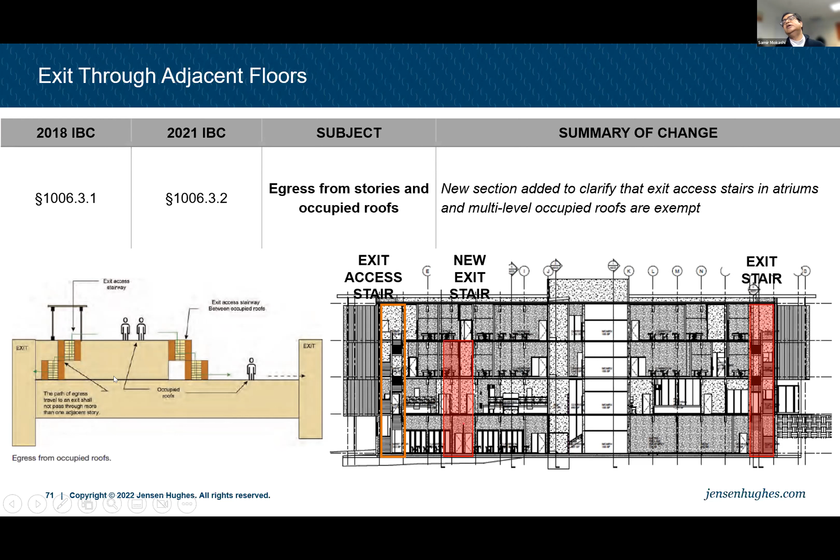So another thing that changed with occupied roofs, and that is a provision that is evolving, is the accessible elevator. Accessible elevator is based on when it is 4 or more stories above the level of exit discharge. So if you had a 5-story building, this elevator would need to be accessible. But now the code is saying if you have a 4-story building and you have an occupied roof, this needs to be an accessible elevator. The issue with the accessible elevator, besides the signage and everything else, is really the emergency power. You cannot run it on the battery. So typically it means a generator, and that's the cost.

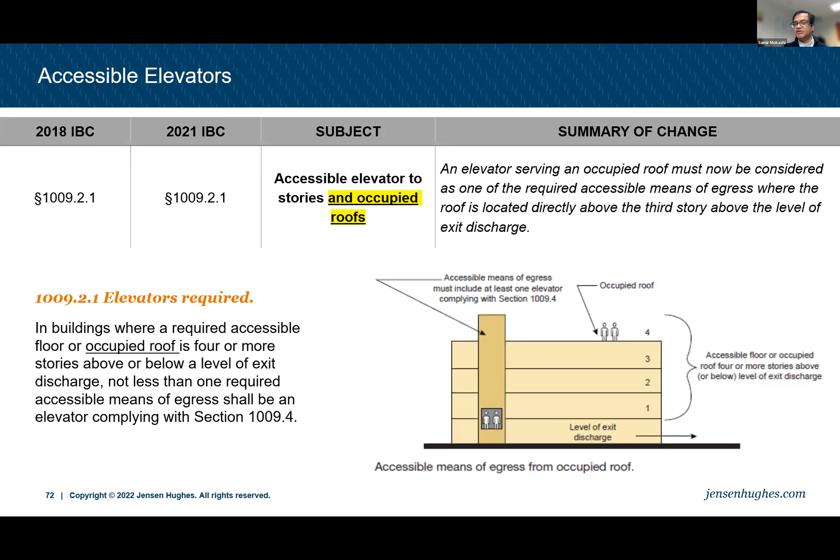The code has increased the foot candles of light that are required at exit and exit access doors from 1 foot-candle to 10 foot-candles. And it is not backed up on emergency power. It is normal illumination on normal power that is required. So that is a new addition to the code.

Size of doors. The code has gone back and forth on the size of doors. The standard door is 36-inch, 32-inch minimum clear. That has been in the code for the longest time. The code, when you had a double door, allowed you to have smaller doors as long as the combined width met the minimum requirement. The code allowed you to have a 5-foot door. That was under the legacy codes. Under the IBC codes, the requirement has been a minimum 3-foot leaf, because if one leaf gets locked, or when you open one door, you shouldn't have to open both leaves to get in and out, especially for accessibility.

The code has always had a 4-foot maximum swing door leaf requirement. That has always come from the door becoming big, heavy and difficult to use. So what the code is now doing is taking away that size restriction, but it still keeps the performance requirement that you start with a 30-pound load to get it moving and 15 pounds to keep it moving. So it's more a performance load, because the hinges, the types of doors and how you can operate them have gotten better. So it's giving a little more leeway to designers to design a door that will work with the code intent rather than limiting it to a fixed size.

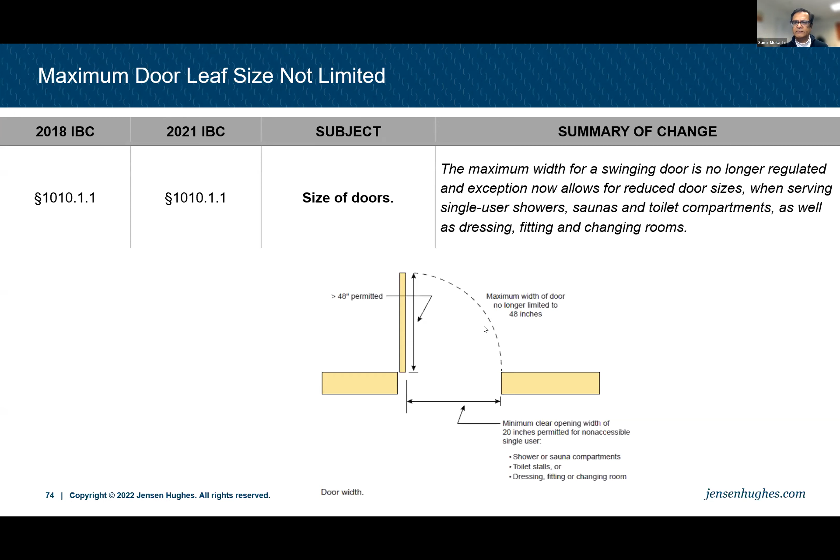So we have had the locking arrangement requirements come into the code for a long time, and we have had a lot of these requirements in the code about allowing this unfortunate reality of our society that we accept mass shootings and change the codes rather than prevent mass shootings. That's the society we live in. And now it extends to daycares.

Locks and latches. This particular aspect of the code has changed quite a bit. And I won't go into all the different details, but a lot more fobs and keypads and other things are now permitted by the code because they've proven to be effective in an emergency to release the door and allow safe egress. So the key part is controlled access, but free egress is the intent of the code. As long as that is provided, that works.

And then prescriptively different provisions have been added in for different requirements, and it just kind of added more. So I-1 condition 2 and I-2 where clinical needs of persons receiving care, egress courts through an exterior place, doors to balconies on residential individual dwelling and sleeping units, doors to balconies and exterior spaces of 200 feet. So there's lots of little exceptions provided, just coming from, it's not a hazard, so prescriptively putting it in the code so you don't have to ask for permission is where it's come from.

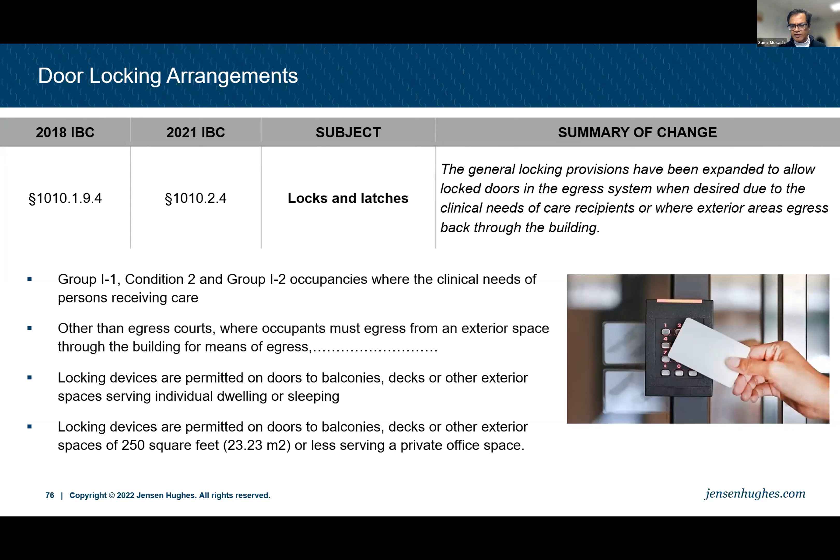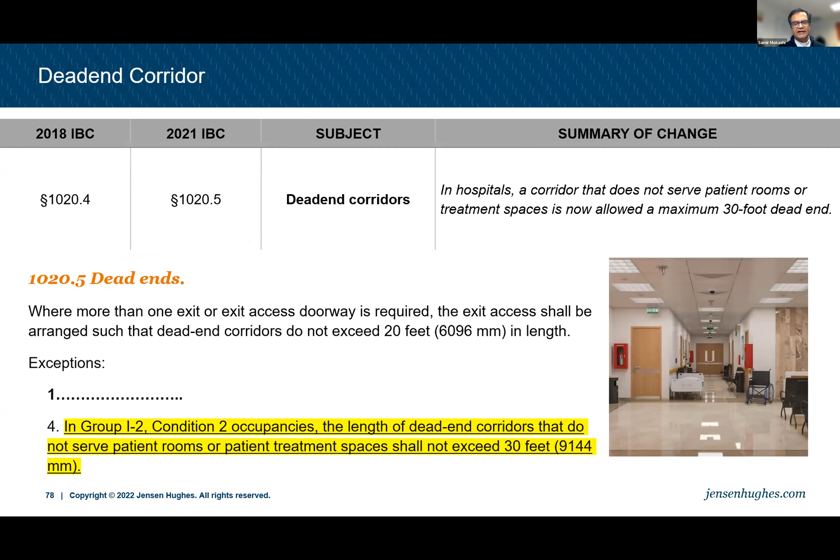Dead end corridors in I-2, length of corridor extended to 30 feet. This is kind of just aligning with the NFPA 101 criteria as well. So anybody that does I-2 would care about this.

The reason for this door is typically the stair comes down and there's a long passageway and other doors coming up. And in an emergency, it is possible that the people coming into that exit passageway might go back towards the stair and there'll be a bottleneck between people going in opposite directions, and create a problem. So having that door separating it makes everybody go in a uniform direction and maintains that flow in an emergency. That's the whole rationale behind it. So that's why when you have no other openings, you can take it out, because everybody will just go straight out.

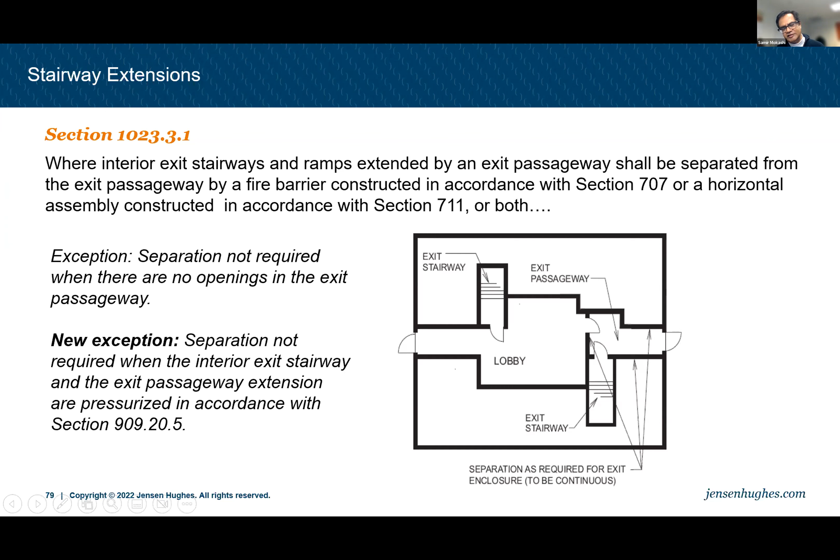Here's something else you need to pay attention to. So exit separation and how many exits you need. One of the things that often comes up is, I have this room and I have a diagonal, I need 1/3 the separation. I don't know how many countless times I've answered the question. Can I measure it to the center of the door? Can I measure it to the inside jamb? Do I have to measure it to the inside jamb?

Right now the code has clarified it's up to the designer. You can go outside jamb to outside jamb if you want to. My recommendation is stay to the center of the door, because as your design evolves, doors move, and it's much harder to fix it at the end. Go conservative in your early designs; at the CD levels you can finalize it and define it.

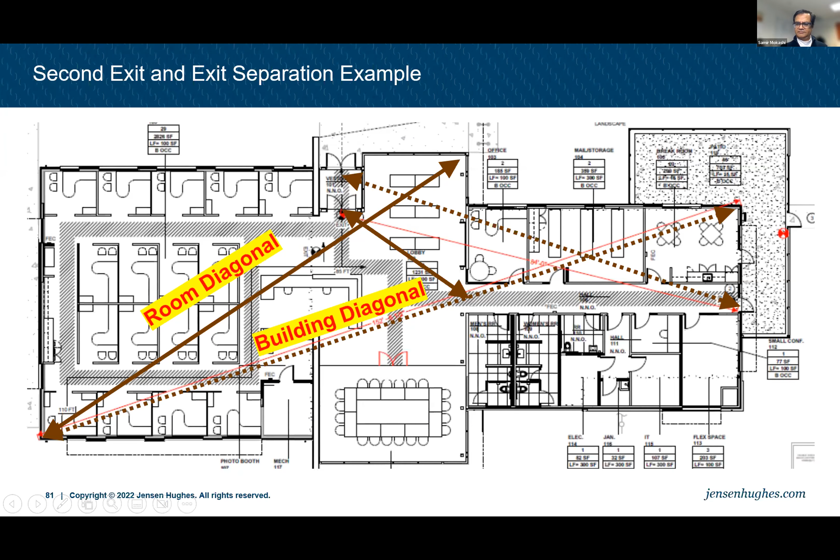Now I'm coming to miscellaneous items that don't fall into one category or another. Combustible lockers are not permitted in school setups. This is primarily because plastic lockers are coming in that ignite much quicker and generate more smoke than traditional wood or steel. Wood is class C, which we can use, so wood is permitted but plastic is not permitted.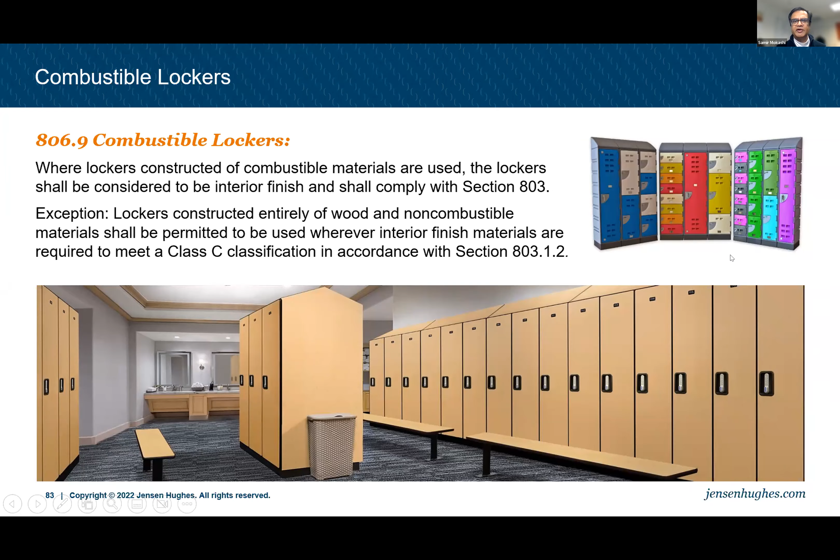In mass timber, as the code is getting more sophisticated, special inspections are coming in for mass timber requirements. There are tables for this, and periodic inspection is also required for sealants and adhesives. Very likely this won't be heavily enforced, but the initial special inspections will get enforced. These are requirements that have to be done because these are custom-built elements and need revisions, to make sure it's getting built as intended.

Overall, the building code has increased the special inspection chapter more than it has in the last couple of cycles.

Concealed spaces for type 4 heavy timber are now getting relief - this provision follows what's permitted in type 4 ABC construction. Type 4 was very prevalent in the early 20th century, even up to mid 20th century, then it went away because of concealed space requirements. Type 4 evolved out of the large Chicago fires and other fires, because it requires exterior walls to be non-combustible and interior wood to be heavy timber. This prevents fire from jumping from one area to another, so it was seen as a very good system, except it allows fire to smolder and spread across.

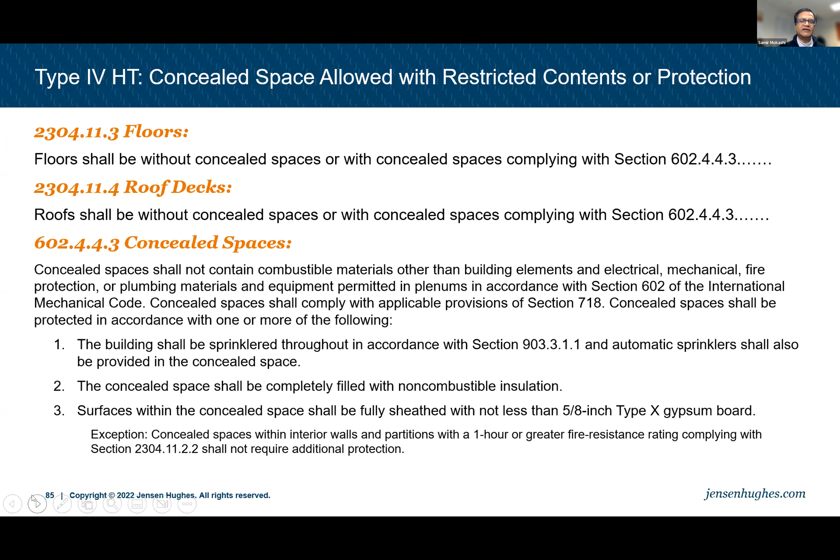In the early 20th century, sprinklers were not very good, but they've evolved and perform far better now. Even though the basic concept hasn't changed a lot, the performance of sprinklers has changed quite a bit and become far more effective than early sprinklers. The lessons we've learned through mass timber are coming into this, and overall the concealed space requirement is following type 4B. So now you can have a type 4 heavy timber building and put in ceilings and do other things you weren't permitted to do before.

Water supply requirement during construction is a new element coming in chapter 33 of the fire code, and these are requirements coming for type 4.

Chapter 33 of the building code versus chapter 14 of the fire code. These are requirements for vertical construction type 3, 4, and 5. Prior to commencement, for type 4 buildings, the fire flow requirement shall be provided by fire hydrants. Fire separation of 30 feet from property line requires 500 gallons per minute; up to 30 to 60 feet, 500 gallons or 50% of the fire flow.

These are requirements because there is more wood construction now, especially with type 3 ABC becoming more prevalent and type 4 ABC coming in, to protect the building during construction when it's most susceptible to fire.

I could be wrong, but I believe this section is removed in Oregon because of BCD's insistence that the building code has nothing to do with firefighting—that's all fire code. Our safeguards during construction are OSHA or fire related. I could be incorrect, so please double check—I haven't verified that deletion myself, but I'll follow up later. That said, it makes sense based on how Oregon approaches building and fire.

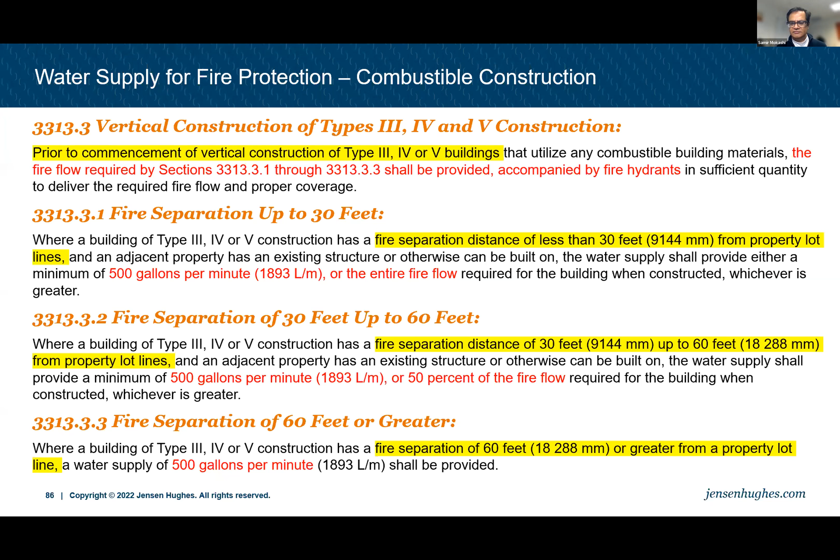Intermodal shipping containers: there are boutique construction companies, developers, and architects enamored with using shipping containers for buildings. But containers are used boxes, and the code has always been reluctant to allow used material in new construction—that was one hurdle. It was also not tested as a building assembly—that was another hurdle. But it has become prevalent, and now the code is approaching and understanding it.

There are exceptions for stationary storage battery arrays listed as equipment, because these types of containers are used for mechanical systems, battery systems, and other things shipped as packaged units that sit outside as exterior units. The question is whether that counts as a building or as equipment, which depends on whether people go inside and similar factors. We've dealt with that on multiple industrial sites, and exceptions are provided for it.

The code has created a whole chapter of requirements for these container structures. Some of them are evolving into beautiful, creatively used spaces—they look great and work great, but there was no code requirement before. Now there's a whole list of code requirements applied to them.

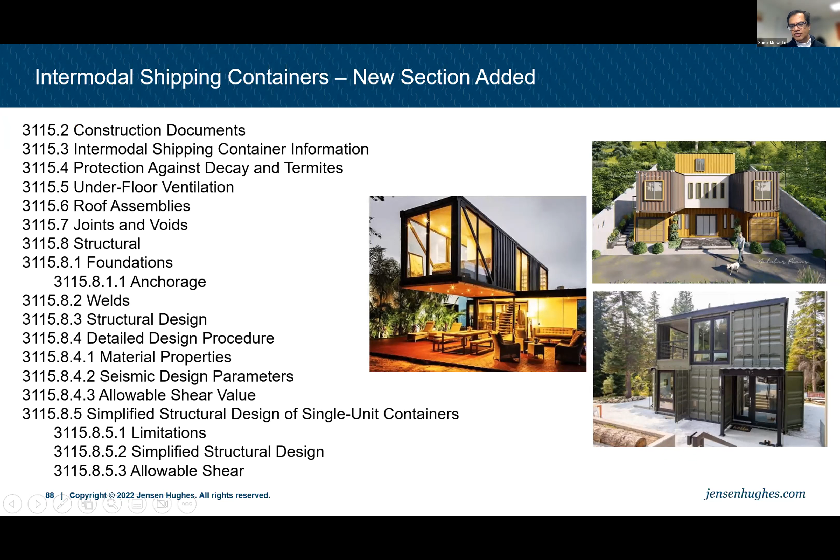Bathrooms in general have lots of requirements. In Portland in particular, and in Oregon, gender neutral bathrooms are an important consideration.

The code doesn't explicitly address gender neutral per se, but it's trying to start addressing it, saying multiple user facilities shall be designed to serve all genders. The minimum fixture count can be calculated at 100%—so if you're serving a non-gender-specific or gender neutral population everywhere, your count should satisfy 100% of the population. If there's a different requirement for men and women, you have to meet the most restrictive standard. I haven't actually had a condition where we've tested it, but that's how I would interpret it.

Family rooms, where you can have an individual bathroom used by a man or a woman, can be added as independent facilities, and you can count these as men's or women's facilities to meet the criteria requirement.

Gender neutral bathrooms, where there are combined bathrooms that anybody can use, have very unique conditions because not everybody might be comfortable going into a gender neutral bathroom. Because they're not comfortable, the bathroom may not effectively be available to them due to their perspective of how a bathroom ought to be. So the code is trying to be aware of and address that in the requirements, but a separate facility is a different facility.

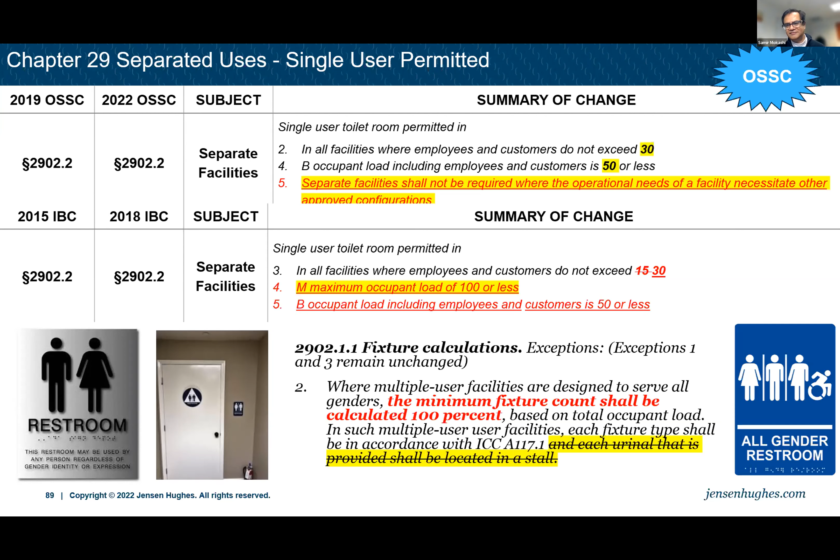Solar systems. It's a new category in Chapter 31 for solar systems. The Fire Code Chapter 12 has solar systems as well, and that is regulated. There is access required at the top of the solar systems or around them. This was a particular solar system done in Hillsboro in a school district, and there was a room underneath with a battery. Because this was a covered space, they were using it as an e-occupancy open classroom once in a while. It became a building, and so we were trying to figure out how to address it.

The intent of having access around this is primarily because if it's roof mounted equipment, the fire department needs access to go around it. But as we discussed with the Hillsboro Fire Department, one of their concerns is that these systems still tend to have fire problems, where the fire starts because of a short or a fuse. How they typically fight it is with a fire blanket thrown on top. So the code requirement is access on 3 sides, but the fire department said we really only need it on the top side, so we can walk up there and roll a blanket down to control it. Understanding where that's coming from and what it means is important.

We also talked about energy storage systems and solar energy systems as part of that chapter. So guards at roof, it's a common thing, but a common miss - when you have less than 10 feet, you have to provide guardrails around it or provide fall protection. This is not a change in this code, but it has been in the code for a while.

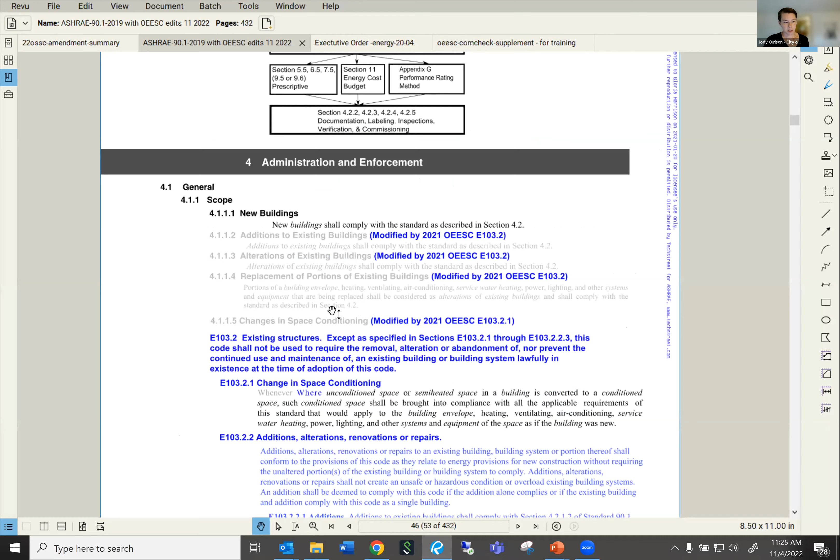A little bit similar to chapter 11 scoping and the A117 accessibility requirements, but not exactly. It's a lot closer to what Samir was talking about with chapter 34 and the IEBC, where it takes this other code and amends different pieces. I was going to show y'all, City of Portland for our internal use takes the ASHRAE code and grays out the portions that were removed by the 2021 OEESC so that we don't accidentally enforce those. And we make the changes and additions so that we're looking at the code and not getting confused when we're making calls.

Let's see. So where we are now, we do think that the codes are going to continue to increase in the requirements. They're going to keep trying to go toward that 60% reduction. All the easy things have been done, and so the next energy reduction requirements are going to be harder and harder is how we expect things to go.

So what we've got right now to submit with your permit, we need the COMcheck still. When you do your COMcheck, make sure you're picking ASHRAE 90.1 2019 edition. There are also Oregon specific forms. The COMcheck supplement has the extra pieces that Oregon has either added or removed.

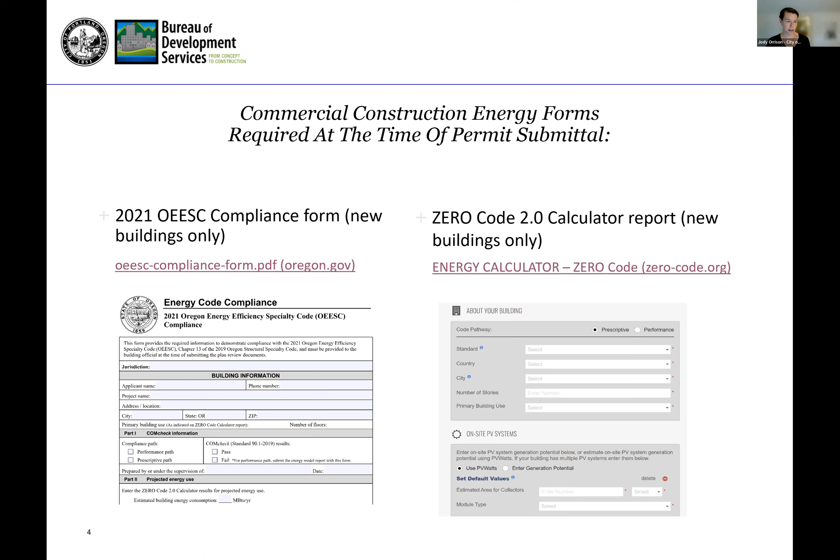Here's some examples of the compliance form. It's got the link to it, and then the energy calculator Zero Code. We've had some folks, internal and external, be kind of nervous about this Zero Code calculator report, but it's really about a documentation piece that doesn't take a huge amount of time, and the numbers that are in that calculator then get put into the energy compliance form.

Oh, and I see there's a couple of chats. I'm gonna wait to the end because my slide deck is much shorter than Samir's, and I'll just answer everything at the end.

So those are the pieces we need to come in with the plan review. During plan review, we're going to be giving you a new document similar to a special inspection form for fireproofing, deferred submittals, or special inspections on all the structural pieces. And it's this energy efficiency compliance acknowledgement form.

It's letting us know whether you're going to do the blower door test at the end for the air barrier design, or if you're doing the independent third-party review, which reviews the design as put into the documents, and does installation special inspections or third-party inspections. So that's one of the pieces. That's this part B in there. And then the other piece is you're acknowledging that at the end, the project will need to give us the commissioning compliance checklist, which I'll show you in a second.

One other point of note, just in the way that Portland does our permitting, the electrical trade permit covers the details of all the electrical systems. There are now some energy requirements in electrical that are too complex to try to put into the CO permit. So we're reviewing those under the ET permit, the electrical trade permit. So that includes, let's see, the lighting controls, which is pretty intensive. There's energy meter monitoring and the way that you set up your meters. There's

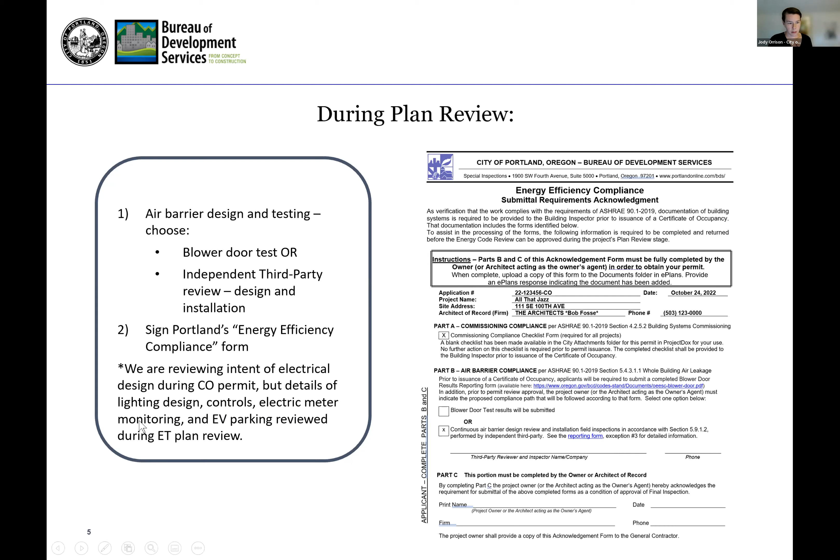And then at the end of construction, we will be asking for this blower door results reporting form, again, a state form that we've been handed that we need to be asking for. And it is kind of the wrap up. That's how you satisfy that energy efficiency compliance form that I was talking about during plan review. So you or your contractor will hand in this blower door results reporting form. It says, here's the third party person who did it, and here's their signature, or here's my blower door test and how we passed it.

There is some discussion right now about whether or not to have a final summary report submitted from the electrical designer, similar to a structural observation report, where the folks who designed the lighting controls and the rest of the electrical pieces, they have to do commissioning anyway, but we're trying to decide whether or not we want somebody to hand in that report, which brings me to this commissioning compliance checklist.

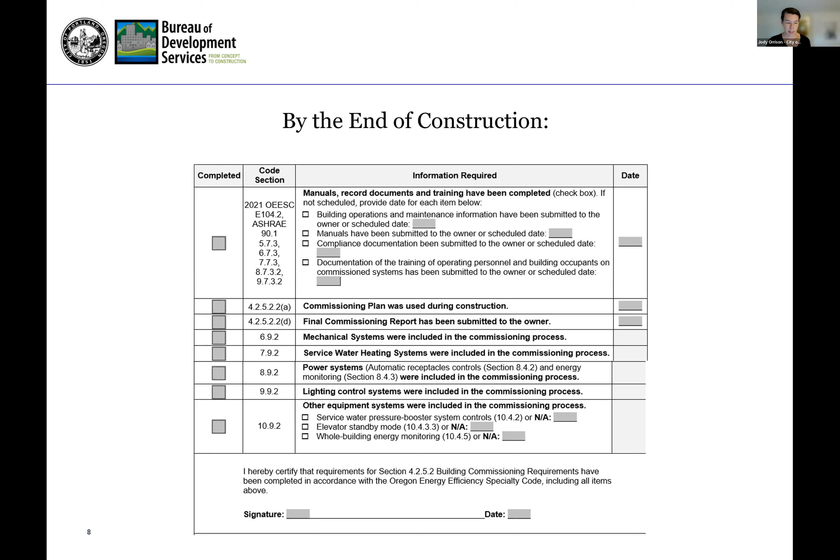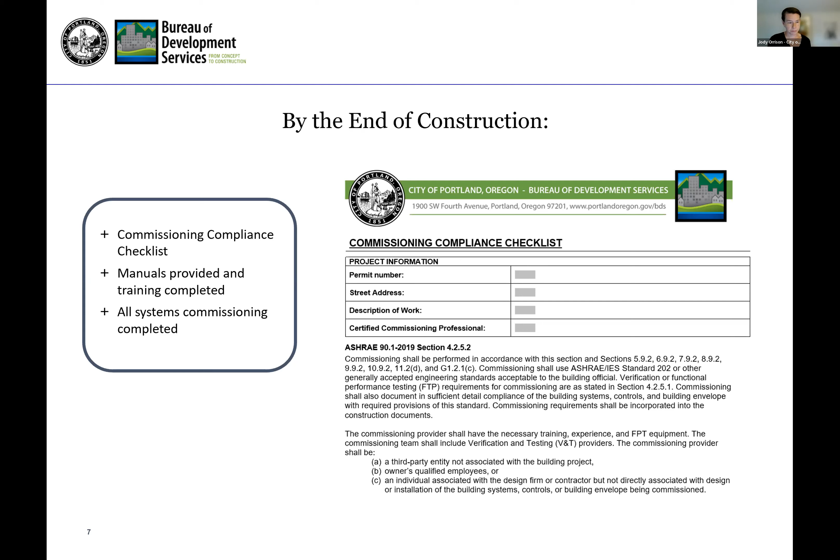This is a document that covers the extensive commissioning and final end of project requirements that are in ASHRAE. We are not asking for all of those different commissioning reports like we would for maybe a smoke control final testing report. We do ask for that, but in this energy world, we're asking for somebody to sign this and say, yes, all the commissioning was done according to these different systems. And I believe it has the certified commissioning professional listed. It might be different ones for different systems, but this document is required before you can get your final.

And this is my last little section, but when I say we need the COMchecks, there are some additional options now. So the standard approach would be just like I said. For your envelope, you've got the COMcheck building envelope report, and there's the supplement form that has those different little pieces that are slightly different than the regular COMcheck. Or there's the simplified building method envelope, a document that BCD came up with, and fill that one out instead of the COMcheck. Really, it's intended for smaller, simpler buildings. I think you'll have to look at it and decide if it is easier to use or not for you and your project. And there's a simplified form for lighting as well as mechanical.